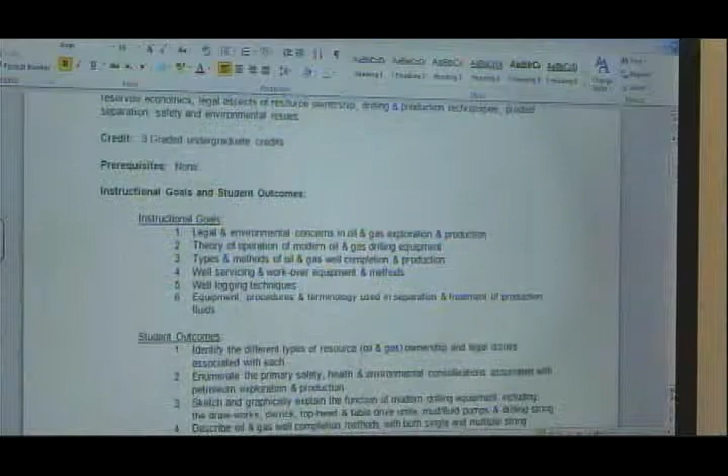Okay, first quiz was over 1 through 4, that's what I thought. So the second one is over 5 through 10, and we will be starting into 10 today. I don't know that we'll cover quite a bit of the well production, secondary, tertiary recovery, things like that. The quiz will not include anything to do with offshore transportation, rail, trucks, or any pipeline.

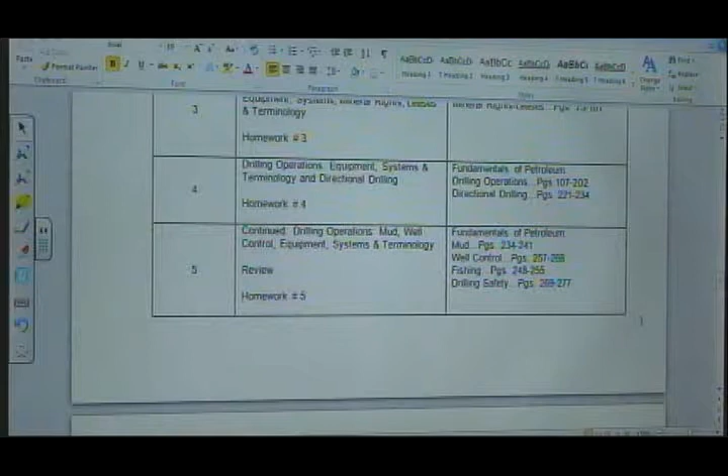It won't have that, but it will have everything 5 through 10. So 5 through 10 covers everything from drilling—there'll be some things on drilling, but we pretty much covered that on our last one. I had you do the drill rig and all that. So this would be more on offshore, and then well completions, casings, wellheads, things of that nature. Some of the things we've been talking about: well production, and then getting into secondary recovery and that type of nature. Maybe a more limited quiz because we are just about half a class behind where we'd like to be.

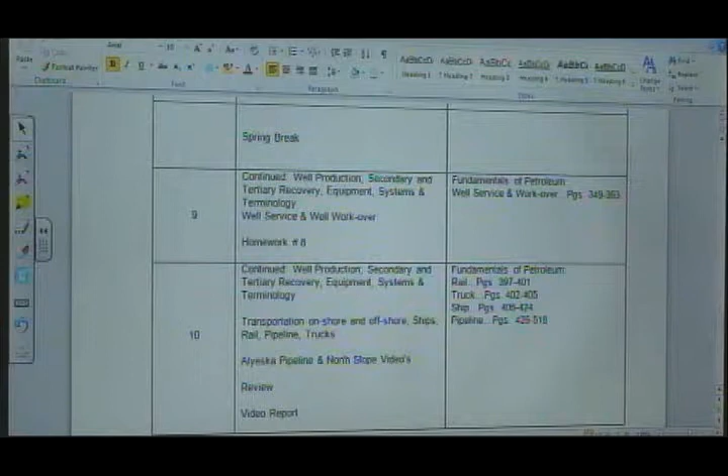But I'm not going to delay the quiz. I want to get it out of my hair so that we can keep focusing on things we need to cover, because we need to move on into emulsion, natural gas, and some of those types of things.

Fair enough? So you may have just a quiz, not even a test, quiz. Wow. Yeah, that was Jeremy, good. I don't believe you, but that's okay. I know you're skeptical, I can see that. Yeah, really, I don't believe this.

I mean, I can omit lots of questions, but I did give a whole different kind for operations today. I gave it in the simulator, so they didn't even have a paper quiz. But then they finally realized what they did to themselves. So I don't know if they're really as happy as they wanted to be.

It's like your take-home quiz. It was fun. Well, they realized that they took everything off of quiz 2 and moved it to the final. The final's already bad. That final's going to be worse.

I don't pull any punches on operations. I tell them first day in class, right? I tell you, it's a bad final. Define bad. What's that? Define bad? Not good.

I've actually had 2 people in the last 8 years get a 99 on it. But both of those people went down south, tested out in refining jobs, and out of 800 people scored number 1. They were extremely sharp.

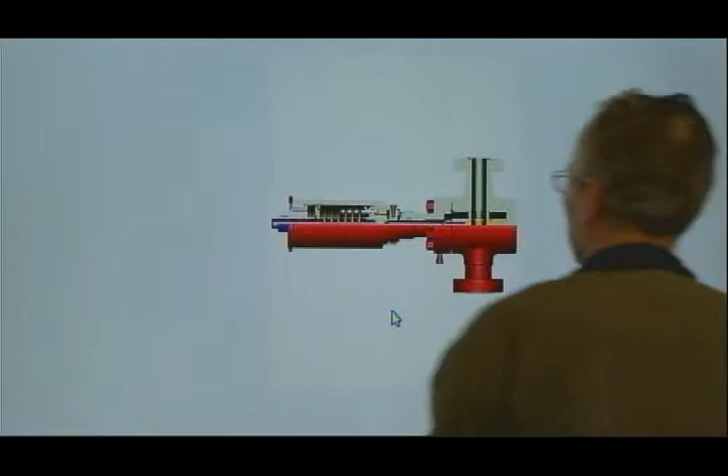It's going to go ahead and open it up so that you are over this way and you're actually flowing through. You've got this valve that comes across, a nice flat valve that's got a hole in the middle of it. And so what will happen is you'll flow up through there, but if you lose your hydraulic pressure, it trips out. The spring will cause this thing to slam shut. When it does, it stops all flow, just abruptly.

Okay? These can be mounted this way. They can also be mounted off your tree on an arm coming off, and I don't know if you can see that real well right here. You might be able to, let's see, I think on the, hold on a second, this was out at, no, I thought maybe the ones at Swanson River showed, this actually showed them.

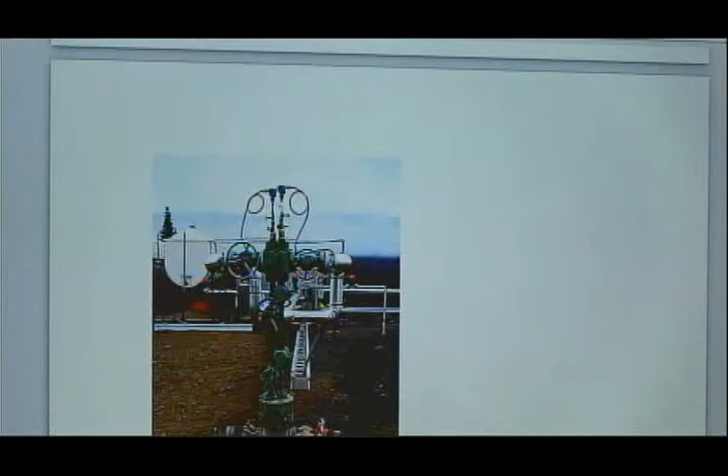And they had, this was a dual completion. We talked about dual completions. No, this didn't have it either. I thought that one of these had that, but it doesn't. Yeah, that was, I'll leave that up because we talked about dual completions. I'll come back to it. Hang on a second, see if I got it.

No, I don't have a real good photo of that where I can show you, but sometimes coming off of the arms, your main production will come on up and then it'll be like so, and then over here, I thought I had one at Swanson River that I could show you on production on a tree at Swanson River, and it shows very, very well on the XTO. Yeah, you can't see it well enough. The Swanson River picture shows it real well, and I don't have that available right offhand. It might be under my production side.

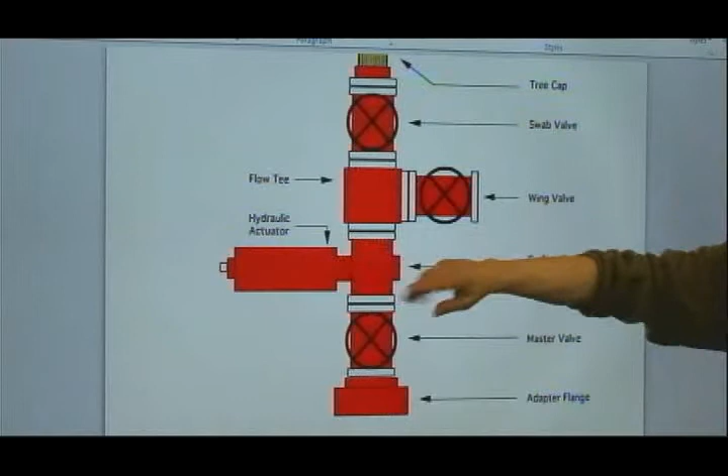You're going to see a tree today I'm going to show you in a little bit that's going to show two master valves, upper and lower. And so then typically, I'm going to have a surface safety valve that's going to be in line in my tree so I can stop all flow. But sometimes this comes right up like this and goes into my cross, right into an arm. There is nothing else. And so then what I might have is I might have it over here where I can go ahead and block all the flow in, which in essence is going to do the same thing. So it doesn't always have to be mounted like this. This is the point I was trying to make.

And so when you think of this and it looks like this could actually be on one of my production arms, and it could be mounted like so, and it would just look different, is what I want you to see.

It can look different than what you might be expecting. So when you go in the field and someone says, well, there's my surface safety valve, they can be made up differently than what you see. They don't necessarily have to be long and skinny like this. They might have a real short, round type of diaphragm system that can be very powerful, but it isn't long and skinny like that.

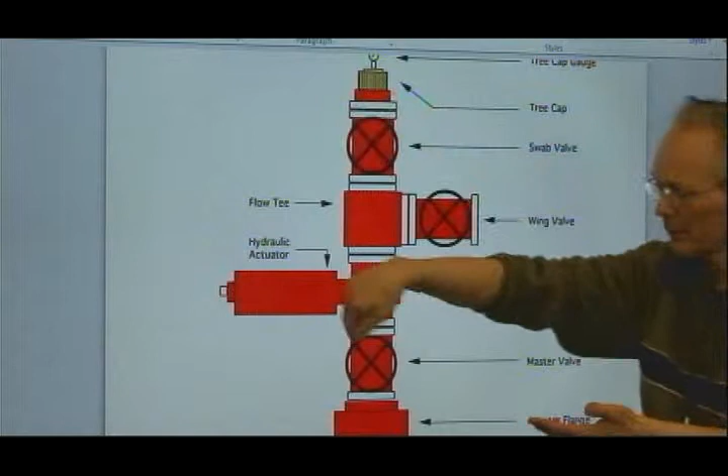All of them, though, will work essentially the same way. I'm going to have some kind of system downstream, coming off of my production valve and off of my wing out here on my production wing, that senses the pressure, which will trip and affect the pilot valve. That tells my hydraulic system to keep this pressured up. When it trips, it tells the hydraulic to either bypass and take the pressure to zero, or it's got a hydraulic pump that tells it to go to zero. It trips out one way or another, all the hydraulic pressure comes off, or pneumatic pressure if you're using air, and then this is going to slam shut. That's what we're really looking at.

So I want you to see that, it's important to know. Now, what was the bad thing about surface safety valves that we brought up last class period, just to review so we can move on?

If something's wrong with the Christmas tree, for some reason, when it gets blown off, there's nothing to stop the rest of the oil from coming out. These are only as good as from where it's secure, from the safety valve. Is it secure from here down? No, and I've got this very dangerous place right here, which was proven in Kuwait.

Remember the Kuwait fires that I showed you guys a little bit last class period? I think I still have those up, hang on, I'll show them again. Those were the fires in Kuwait, which Saddam Hussein, in the first Gulf War, blew up. As he left Kuwait, he blew up all the Christmas trees to try to eradicate their oil fields, and he did a pretty good job of destroying a lot of oil.

They were all free-flowing. Okay, and so to alleviate that problem, the state of Alaska looked at this, and nationwide also. Hang on, we'll open this up a different way.

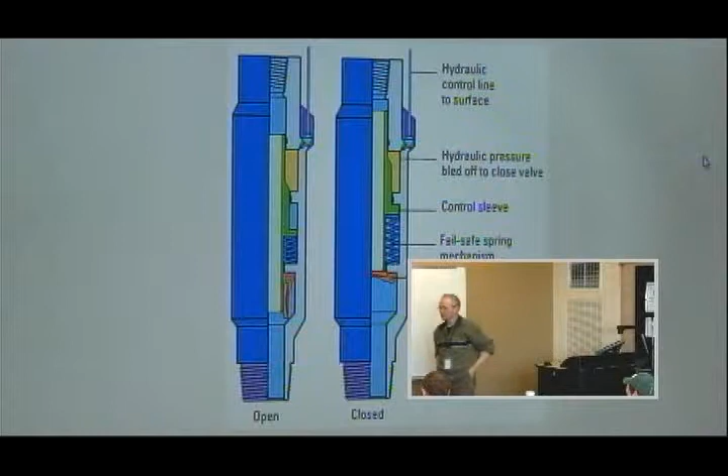The state of Alaska instituted rules that they started using subsurface safety valves, which means that when you go down the well, if I were to draw this out, somewhere down below, and I think this is about where we ended up last week, if this is my Christmas tree up here, let me draw this. I'm coming down in my well all the way down below the surface, anywhere from, say, a few hundred feet to 1,000 feet or more. I'm going to have a subsurface safety valve that I'm going to mount in my production line.

I'm going to be down below, down to a place where this is secure, so that if it blows out, it's not going to blow out and go into the formation, into my water zone or anything like that. In other words, if I even had a blowout in the line down here somewhere, maybe there was an earthquake and it messed my production line up, then this would go ahead and shut, and it would keep me from leaking into the water strata or anything like that.

So there's a lot of advantages in having these at different levels. In the North Slope, they are anywhere from 500 to 1,500 feet down or more. So it all depends on the well.

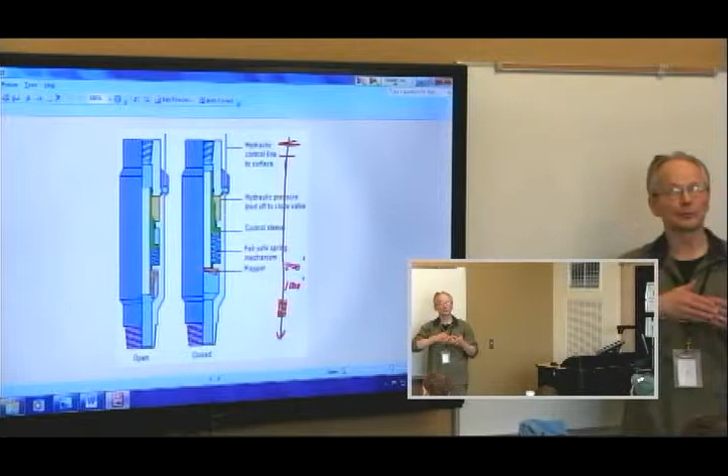In Alaska, over water, any gas well has to have subsurface safety valves. Any gas wells on land have to have subsurface safety valves because they're always free flowing. And this is just general rules, it gets very specific anymore because there's been some qualifiers put in. But you can assume all gas wells, and any oil well over water that is free flowing, is going to require a subsurface safety valve. Now, it's not that way necessarily on land. It depends on, they've changed the rules to where it has something to do with being adjacent to facilities or buildings and different things like that, where if it caught fire or something, it could actually cause some destruction.

So there's some real specific rules now. It's not necessarily universal just because it's on land. On land, it's considered easier to go ahead and obtain access to put it out if there was a problem. I don't know that I agree with that. I think all free-flowing wells should have these, but they do cost money.

Why do they cost money? What's the reason anybody can see right here? It would cost money to put one of these in. They look complex. You've got to put it down hole. I have to put it down hole.

What's it take to put this down hole? Can I do it with a wire line? No, you're gonna have to pull the production string up. I have to fit this into the production string, run hydraulic lines down, and assure this is working correctly. Then I have to have a Christmas tree and a wellhead up above that will accommodate that line coming through it. Almost the same as if I had an ESP, same kind of thing. I've got to have some way of getting through that wellhead and that Christmas tree.

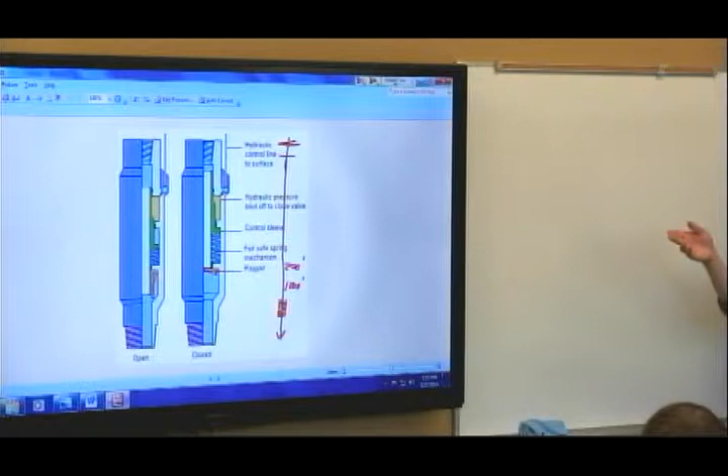So these are expensive to put in, and then you have to work with them, and if it fails, uh-oh, you have to drag it out. I have to get a workover rig in, pull all of that string back up, service it, and put it all back down again. Is that costly? Yeah, a lot more than if it's just up there on the surface. So those are some of the considerations.

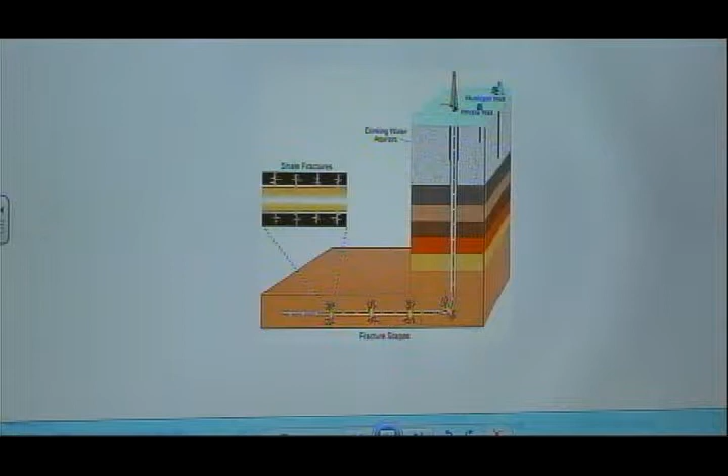When I say fracture the zone, there's a number of ways of doing that. One is I use high pressure water. I literally take water at a very high pressure and pump it down into my well, forcing it out into the formation at such a pressure that I'm cracking the formation. With your Marcellus Shale, that will make all kinds of lines, just like what you see, and this is what it does.

I think I've got a better rendition of this. Hang on just a second. This is a well before and after fracture is what it would look like. Before fracture and after fracture, in which you actually would increase the roadways, if you will, for oil to begin to seep in.

These just being little bits of oil. And when we're out walking my dog, I think I ended up with more hair on me than she did. You know, see all these hairs in my eyes.

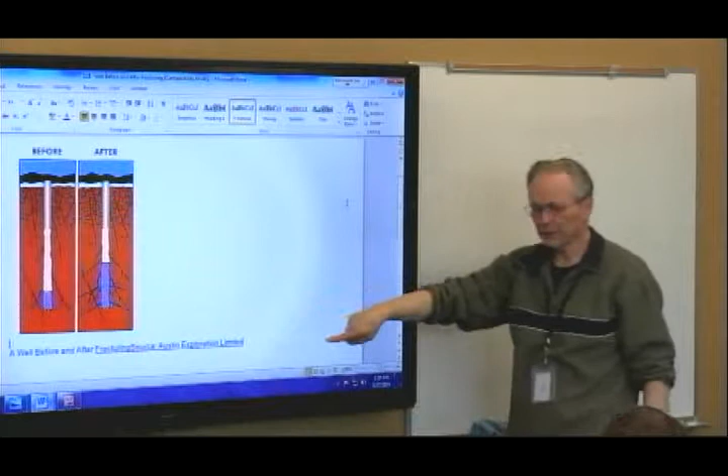So part of this fracturing—and there's nothing magic about it having to be a horizontal well—fracturing was around when we had nothing but vertical wells, and we would fracture formations. Then when we got into deviated wells, we'd fracture formations too. But now it's really good for these long horizontal completions, because if I fracture and then I've got these long completions, I can take what were marginal oil wells or gas wells before. I've made a long highway, and I can begin to pull it in. So I use high pressure water.

Sometimes I'll use what's called proppants. Just a minute, I'll show you what I'm talking about. Proppants are literally frac sand. And frac sand, or the term proppant...

I don't know if that's spelled with an A-N or an E-N. Probably an A-N. Yeah, proppant. Okay, who said A-N? I did. I've read it, proppant. Yeah, I get my E-Ns and my A-Ns confused.

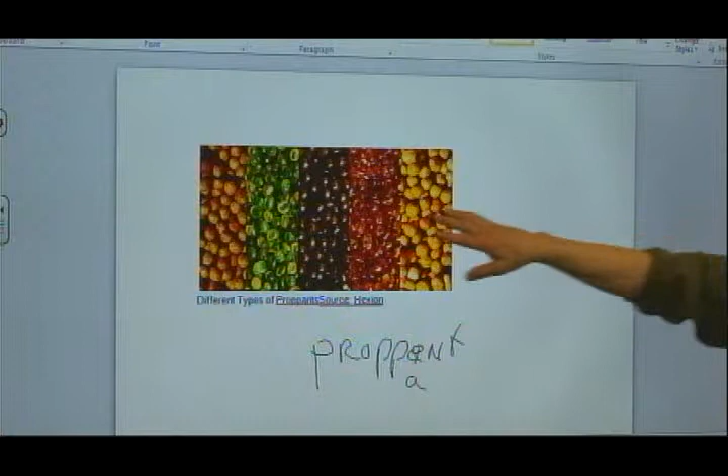Proppants originally were real sand, and what it was intended, and now they are made out of a polymer, real hard, extremely hard polymer.

When I say hard, we bought a bunch of this used stuff when I was running a sandblasting business, and we were using it and then recycling it, and we can't destroy this stuff. Terrible sandblasting medium, it has no jagged edges on it, so all it did was just like a little bead blast. And you'd recycle it, there was no dust, because it doesn't break down. In fact, you can't break the dumb stuff down. It's so hard, it's as hard as a diamond, and you can't cut it, you can't smash it, you can't break it, you can't do anything.

And that's what it's intended to do, is to mix it with the water, under high pressure, blast it into your formation, little minuscule bits of sand. What they do is keep little areas of the formation open to increase the permeability. It's not that I'm making spaces for the oil to be there, the oil is there, it just doesn't travel well because it doesn't have good trails to travel on. So you jam it with frac sand and high pressure water, and you fracture the formation, you blow this stuff back in there, you create these oil highways, and then you increase the production.

The other way you can do it is to also use acids of different types, different chemicals. The acids will literally go into the formation, and what they do is begin to etch and eat away at the rock, and they open things up. Any minerals that can be easily dissolved by the acids will then open up these highways.

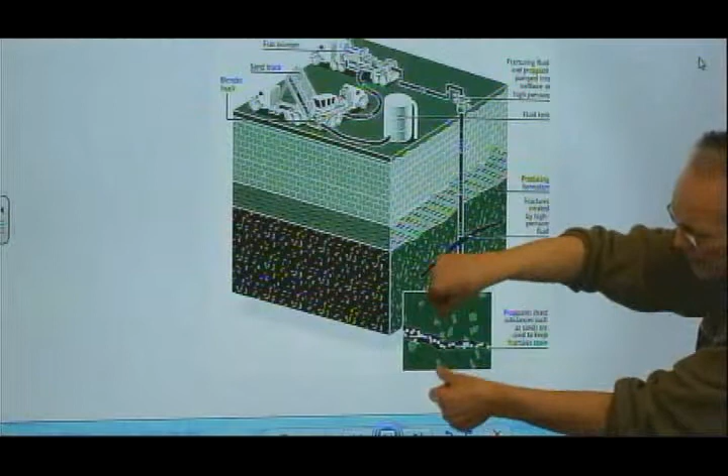This gives you an idea. Here we've fractured it with high pressure water. Here we've added the proppants that will then tend to open it up. Now, if I put chemicals in with that, then what I'd be doing is eating up little pathways that come into these areas that I have made. And so that's what I'm looking at.

But don't think it's great big avenues and holes in the formation. It's just a shattering. Anybody ever had a windshield break because of cold weather? Spider cracks, yeah, just spider cracks everywhere. The same thing, that's what you're looking at, is these minute cracks and trails all over inside the formation. And don't think just in a horizontal plane, think 360 degrees, three-dimensional. It's like one great big huge mass of roots going into the formation.

The more the better, I would imagine. Yeah, it is, up until you get to the point where it's too much cost. And it is very costly because we're talking about a lot of equipment, a lot of high water. A lot of the water is reused now because it has a lot of cost value, especially in places like West Texas or New Mexico where water is not available. And then you're using frac pumpers, big triplex pumps, maybe multiple pumps, where you've got a lot of pressure, a lot of volume, and a lot of hammering to get this pressure up and push it into the formation. You're pushing material into something that doesn't want to receive it, and so it cracks and shatters to receive what you're doing.

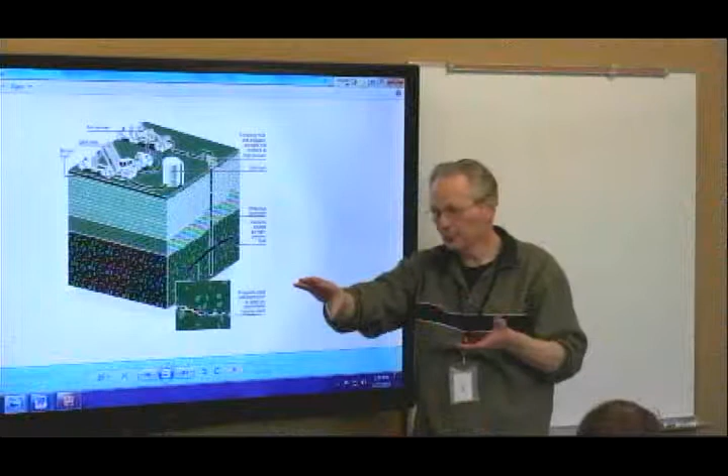And it has caused problems, absolutely, because of careless regulations and careless oversight on the part of the different state governments when it first started off. All of this Marcellus shale and some of the oil, shale oil, nobody was watching what was happening, and people were drilling down very shallow near the water zones, near your aquifers.

So then they were going ahead and fracking, and now gas was intermingling. What did we find when we don't have good casing? Things will flow from one area to another, and a lot of these were run without any casing. They were not just barefoot completions, they were completions without casing.

And so then what you had is a tremendous intermingling of water and natural gas, more natural gas problems than anything, so literally the horror stories of people opening their spigot for their water and their water would actually catch fire, that's true. There was enough gas coming out of their water that they could torch it off.

So here you've got a faucet, you put a match to it, it burns, now I've got hot water. No, you'd get rid of your heating bill that way. So the only reason fracking has a bad name is because people were careless and dumb. Yeah, and a lot of that's under control now. It really is, serious control. And there's been a lot of regulations put in.

If you read the news, fracking's been going on for well over 100 years in California. It's been going on in Texas, New Mexico, all through the Midwest. Here in Alaska, it's been going on for almost 100 years, and there was never any problems. It was where it was very, very loose, a boom mentality situation, and people just took advantage of it for a few years. Gave it a bad name, but it's pretty well settled down now. Most of the problems they talk about now, I'd say 99% of them are from prior years. So it's pretty well settled down, and it's well under control and oversight, but it wasn't in the beginning.

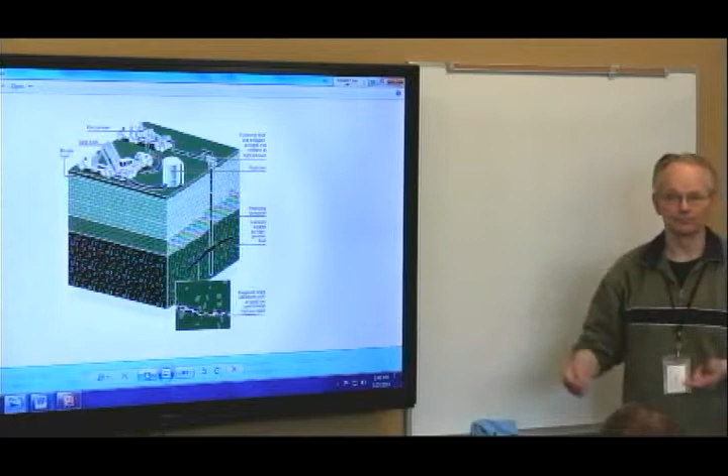Where am I doing this at? At exactly what level in my oil well? Let's take one that's not real deep. We talk about 10,000 feet here, but let's say we're at 7,500 feet. Am I going to have my potable water aquifer at 7,500 feet down? Possibly, probably not. There's probably going to be clay layers in between. And if I did have a viable aquifer at that level, I wouldn't be allowed to frack there. EPA wouldn't let you do that.

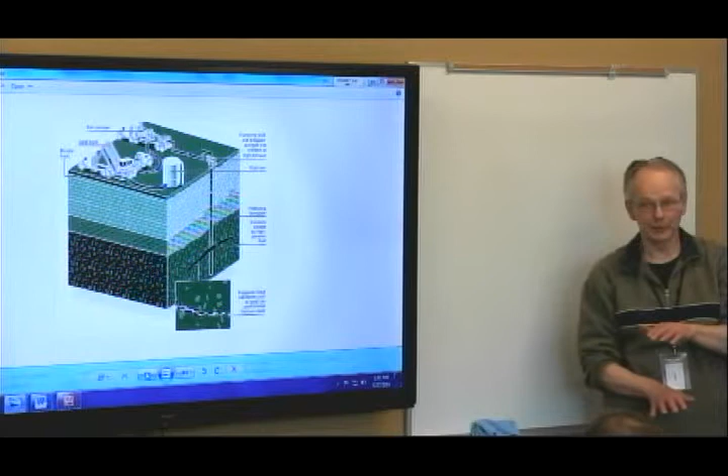But if I'm at, say, around here, and there's been a lot of hydraulic fracturing going on for years, if nobody even knew it, but I was fracturing at 10,000 feet, is that going to affect my drinking water?

Probably not. Who in here has wells that go down over 150 feet? Anybody? I think our low is like 26. Yeah, the wells for Agrium were at about 350 feet. Chevron's wells were at about 300 to 320 feet. You're way out of range. And those were considered deep wells around here, and they were massive producers. There's a river down there that you can't believe. You can pump all the water you want.

We were pumping right about 2,500,000 pounds of water an hour at Agrium. Out of about 4 wells, maybe 5. That's a lot of water. But it was from just 300 feet down.

Harley? That's the thing, the reason we probably pump so much water without drying up the reservoir or whatever is probably because we're on a sedimentary kind of area, a basin, right? And which is pretty absorbent. And we've got this inlet just right there, and it's probably just gravity feeding water. Lots of water, and we've got a lot of snow melt off our mountains. Now, some places don't have that.

You get down in West Texas, and there's a lot of concern, because you have the Ogallala Aquifer, but there's a lot of people drawing water off of that, and they're using it for what? You've been down in Texas. Agricultural irrigation, that's right, irrigation, drinking water, things like that, and everybody's using it. Now, do I want to go ahead and have people doing fracturing that are using vast amounts of water with no recovery? That'll piss people off. Yep, it tends to make them really upset, that's right.

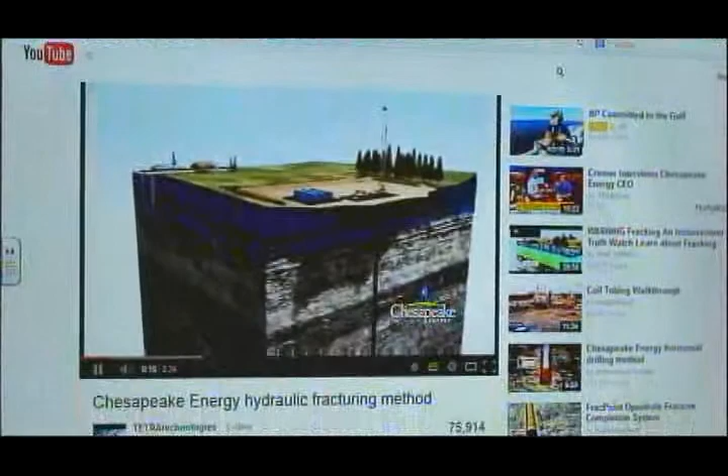In preparation for the fracturing process, the casing will be perforated in the horizontal portion of the well using tubing-conveyed perforating guns containing explosive charges. The perforated intervals are spaced approximately 50 to 80 feet apart and create a connection between the production casing and the shale formation. With the initial perforating complete, the tubing and perforating guns are pulled to the surface, and the workover rig is replaced by a hydraulic fracturing crew consisting of a number of high-pressure pumps and blending equipment.

This equipment will pump a mixture of water and proppant, usually sand, through the newly created perforations in the production casing and into the shale formation.

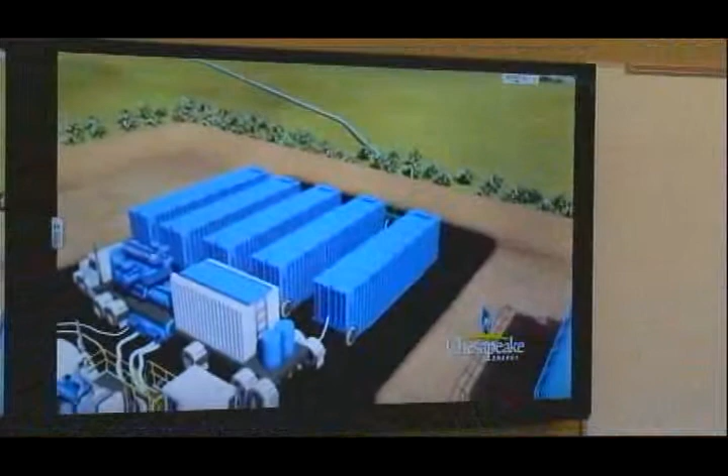First, water is passed from a water storage impoundment into the blue working tanks depicted on this location. The water is then pulled into a hydration unit, which provides the ability to gel the fluid before it is transferred to the blender. At the blender, proppant and a small amount of chemicals that aid in the fracturing process are added. The blender transfers the fluid and proppant mixture to the pump trucks through the low pressure side of the manifold.

The fracturing pumps increase the pressure of the fluid, sending it back through the high pressure side of the manifold to the frac tree where it enters the well. The entire fracturing process is controlled from the treatment monitoring van.

When the fracturing fluid reaches the perforations, pressure builds until the shale formation fractures, allowing fluid to enter into the formation. Additional fractures are created along natural zones of weakness in the shale. These fractures are contained within the shale formation, well below the ground.

After an initial stage of fluid called the pad is pumped to create a fracture area, proppant is added to the fluid and is distributed throughout the newly created fracture network. At the conclusion of the fracturing treatment, the proppant allows the fractures to remain open so that the natural gas can flow into the production casing and to the surface. This completes the first of several stages in the fracturing process.

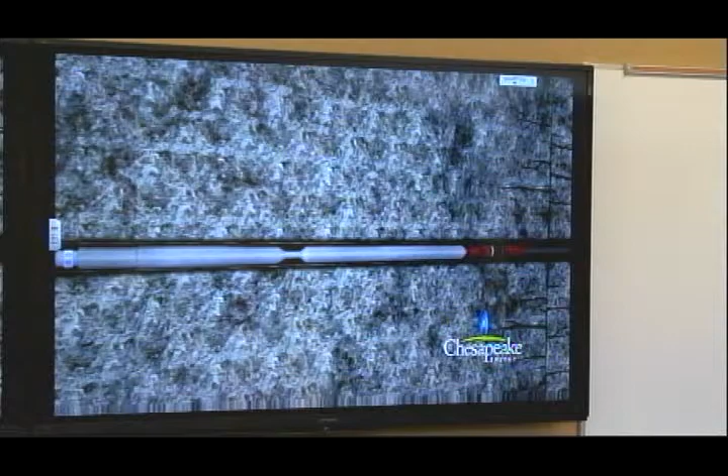This process is repeated by lowering and pumping down an isolation plug and perforating guns into the wellbore to complete the next stage of fracturing. This time, the tools are conveyed into the well by a wireline unit, which allows the fracturing process to proceed much faster and more efficiently.

A lubricator is used to control the pressure of the well while the operation is taking place. On the bottom of the perforating gun, a composite bridge plug is placed to isolate the newly fractured zone. This ensures that the subsequent fracturing treatment is contained in the current zone.

The perforating gun is again fired at roughly 50 to 80 foot intervals, creating a connection between the production casing and the shale formation. The fracturing process is then repeated until all of the stages are completed. A typical shale well has approximately 8 to 12 stages of fracturing. At the conclusion of the fracturing operations, the isolation plugs are removed from the well and production can start. The produced fluids are diverted through a flowback manifold into storage tanks. The fluids are then recycled or disposed of according to state and federal regulations.

That help a little bit? Well, without the proppant, those fractures will naturally reseal? Yeah, that's absolutely right. Yep, they will reseal.

Now, there was an acidizing process that they used to do in the old days, which would help to eat that out and help keep it open, but they still would tend to reseal. The proppants make a huge, huge difference.

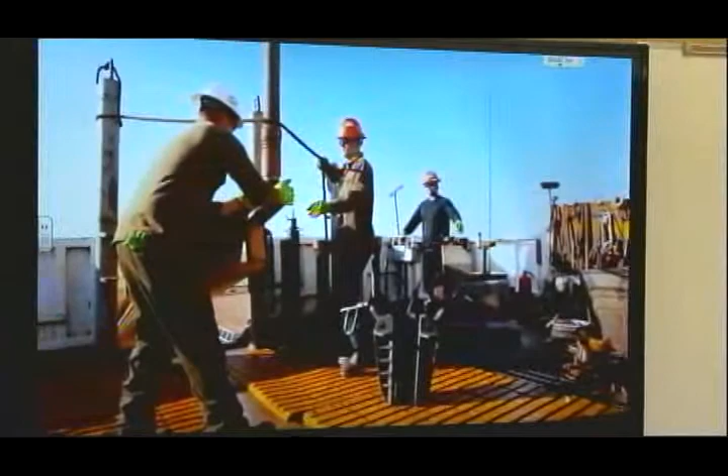Geologists have known for years that substantial deposits of oil and natural gas are trapped in deep shale formations. These shale reservoirs were created tens of millions of years ago. Around the world today, with modern horizontal drilling techniques and hydraulic fracturing, the trapped oil and natural gas in these shale reservoirs is being safely and efficiently produced, gathered, and distributed to customers. Let's look at the drilling and completion process of a typical oil and natural gas well.

Shale reservoirs are usually 1 mile or more below the surface, well below any underground source of drinking water, which is typically no more than 300 to 1,000 feet below the surface. Additionally, steel pipes, called casing, cemented in place, provide a multi-layered barrier to protect freshwater aquifers. During the past 60 years, the oil and gas industry has conducted fracture stimulations in over 1 million wells worldwide.

The initial steps are the same as for any conventional well. A hole is drilled straight down using freshwater-based fluids, which cools the drill bit, carries the rock cuttings back to the surface, and stabilizes the wall of the wellbore. Once the hole extends below the deepest freshwater aquifer, the drill pipe is removed and replaced with steel pipe, called surface casing. Next, cement is pumped down the casing. When it reaches the bottom, it is pumped down and then back up between the casing and the borehole wall, creating an impermeable additional protective barrier between the wellbore and any freshwater sources.

In some cases, depending on the geology of the area and the depth of the well, additional casing sections may be run and, like surface casing, are then cemented in place to ensure no movement of fluids or gas between those layers and the groundwater sources.

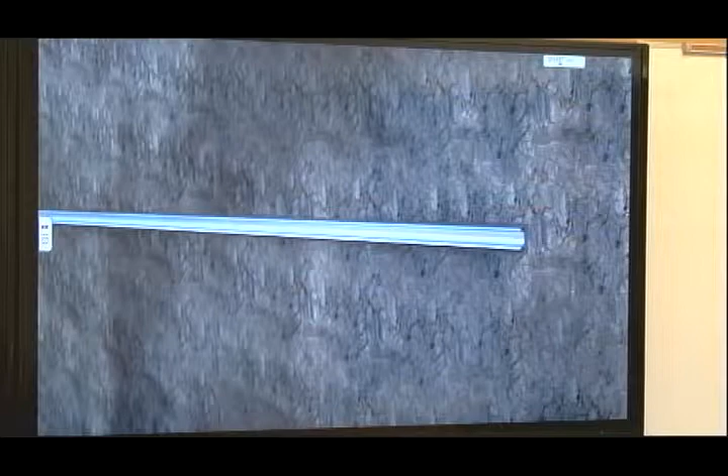When the targeted distance is reached, the drill pipe is removed, and additional steel casing is inserted through the full length of the wellbore. Once again, the casing is cemented in place. For some horizontal developments, new technology in the form of sliding sleeves and mechanical isolation devices replace cement in the creation of isolations along the wellbore. Once the drilling is finished and the final casing has been installed, the drilling rig is removed and preparations are made for the next steps, well completion.

The first step in completing a well is the creation of a connection between the final casing and the reservoir rock. This consists of lowering a specialized tool called a perforating gun, which is equipped with shaped explosive charges, down to the rock layer containing oil or natural gas. This perforating gun is then fired, which creates holes through the casing, cement, and into the target rock. These perforating holes connect the reservoir and the wellbore. Since these perforations are only a few inches long and are performed more than a mile underground, the entire process is imperceptible on the surface.

The perforation gun is then removed in preparation for the next step, hydraulic fracturing. The process consists of pumping a mixture of mostly water and sand, plus a few chemicals, under controlled conditions into deep underground reservoir formations. The chemicals are generally for lubrication, to keep bacteria from forming, and help carry the sand. These chemicals typically range in concentrations from 0.1 to 0.5% by volume and help to improve the performance of the stimulation.

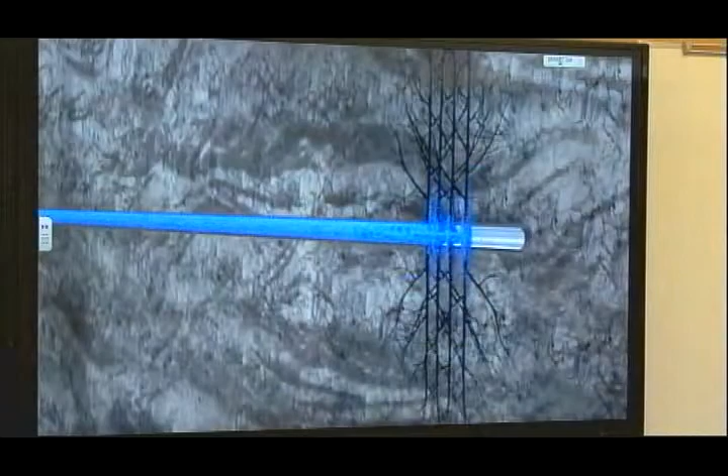This stimulation fluid is sent to trucks that pump the fluid into the wellbore and out through the perforations noted earlier. This process creates fractures in the oil and gas reservoir rock. The sand in the frac fluid remains in these fractures in the rock and keeps them open when the pump pressure is relieved. This allows the previously trapped oil or natural gas to flow to the wellbore more easily.

This initial stimulation segment is then isolated with a specially designed plug, and the perforating guns are used to perforate the next stage. This stage is then hydraulically fractured in the same manner. This process is repeated along the entire horizontal section of the well, which can extend several miles.

Once the stimulation is complete, the isolation plugs are drilled out and production begins. Initially water and then natural gas or oil flows into the horizontal casing and up the wellbore. In the course of initial production of the well, approximately 15 to 50% of the fracturing fluid is recovered.

This fluid is either recycled to be used on other fracturing operations or safely disposed of according to government regulations.

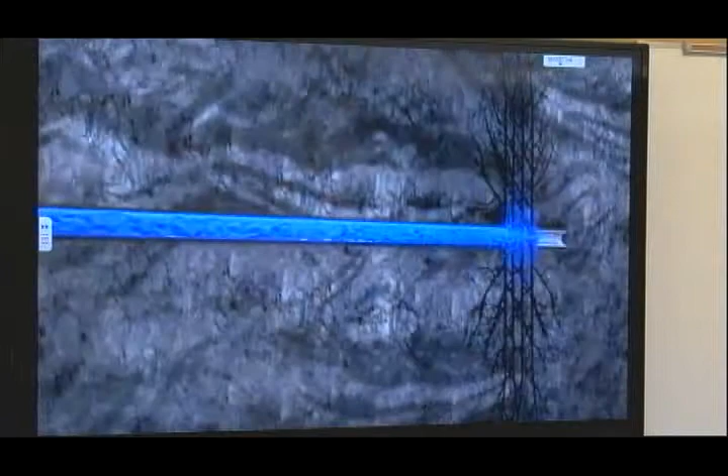The whole process of developing a well typically takes from 3 to 5 months: a few weeks to prepare the site, 4 to 6 weeks to drill the well, and then 1 to 3 months of completion activities, which includes 1 to 7 days of stimulation. But this 3 to 5 month investment can result in a well that will produce oil or natural gas for 20 to 40 years or more.

When all of the oil or natural gas that can be recovered economically from a reservoir has been produced, work begins to return the land to the way it was before the drilling operations commenced. Wells will be filled with cement and pipes cut off 3 to 6 feet below ground level. All surface equipment will be removed, and all pads will be filled in with dirt or replanted. The land can then be used again by the landowner for other activities, and there will be virtually no visual signs that a well was once there.

Today, hydraulic fracturing has become an increasingly important technique for producing oil and natural gas in places where the hydrocarbons were previously inaccessible. Technology will continue to be developed to improve the safe and economic development of oil and gas resources.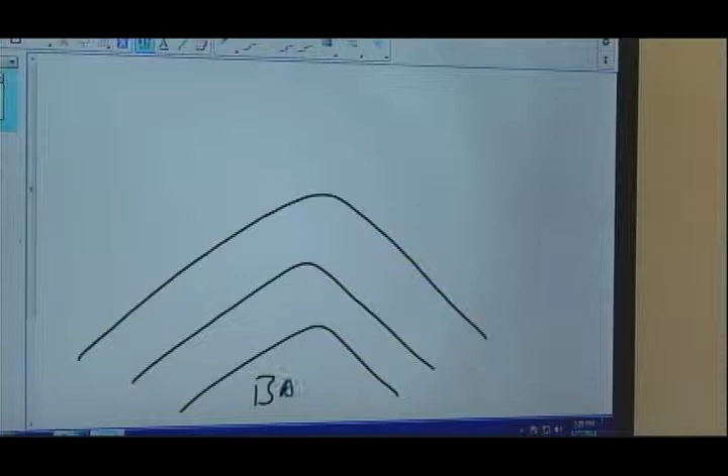Okay, so we've got our base rock here, and our capstone up here, and in between we have a formation. We're going to call this an oil formation. We have water right along here, then oil coming up to about here, and gas up above. So this is gas, this is oil, this is water. You guys are all familiar with this, right?

If I have enough pressure pushing on this water, say this formation goes out some distance, and I've got pressure pushing in on this water, it's going to cause that hydraulic pressure to give my oil a pretty good PSI. So if I drill a well down into this, it's going to want to come up here and produce a blowout, if you will.

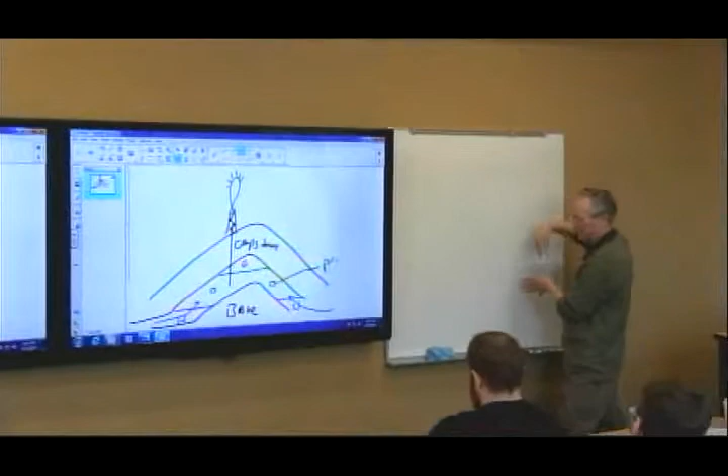But it's going to have natural pressure, because way back over here somewhere I may have some sort of aquifer or underground formation of ancient water, or it's coming clear up out of an anticline here, down through a syncline, and then pushing up. I could have some sort of dome over here, or who knows what, and I've actually got a lot of pressure. I've got an interface here between my oil and water, but I've got hydraulic pressure, just like a ram, pushing here. Maybe this comes down and pinches out over here, so now I've got this tremendous pressure. That oil is going to reflect that pressure, and until that pressure goes away, that oil is going to want to produce in free flow.

Free flow, okay? That's the term I'm looking for here.

As I begin to free flow, over time my pressure will begin to drop. If this is a 10,000 foot well, I'm going to have, coming back down right here at the bottom of my formation, about 4,300 pounds. We'll just keep that nice and easy to think about.

That means that if my formation is above that 4,300 pounds, or down here in my oil, if I've got say 5,000 PSI, I've got just under 700 pounds of upward pressure wanting to push up this well, so I can still produce. I'll be able to produce until the formation reaches that point.

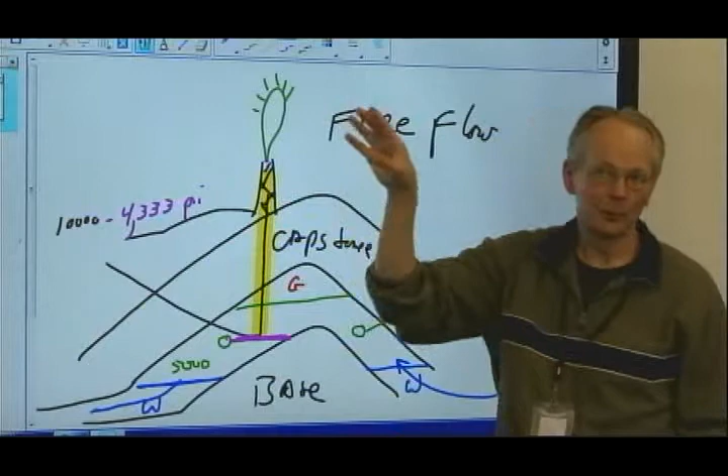We call this an artesian well if it's a water well. We've got artesian wells all along both sides of the Kenai River. There's this little farm down here that, I don't know what they call themselves now.

Huh? M&M? What's that? Diamond M. Diamond M. Yeah, Diamond M.

It's the Martin family, and they used to have, right alongside their house, an artesian well that flowed right out of the top of the casing. Scott Kraxberger, who taught here, used to be connected with Kraxberger well drilling. That was his dad's business, and they brought in a well one time down by the Kenai River that they couldn't cap. A 235 gallon a minute free-flowing artesian well right out of the top of the casing, blew out. It flowed like that for years. Free-flowing well.

So you can have free-flowing water wells. You can have free-flowing oil wells and gas wells. Gas is always going to be free flowing, but we're going to specifically look at oil.

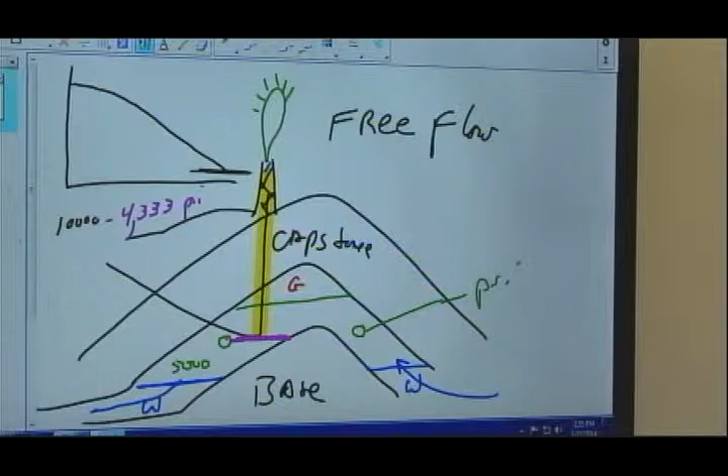So as long as my formation pressure was above my standing pressure coming from the surface, or my static pressure, I'm going to have a free-flowing well. But over time that's going to diminish. If I were to draw a graph of it, it would look something like this: over time my pressure would begin to fall off until I reach that place where it doesn't want to flow anymore. When it's depleted, it no longer free flows.

And I have to go into something that we call secondary recovery.

Doesn't mean I have to put a pump in right away, but I am going to have to go to secondary recovery because it won't free flow anymore. If I drop that 5,000 PSI down, and I'll do it sooner than this, but if I drop this down and I finally used up the pressure, my well is now at 4,333.

Okay, if I had 4,334, what would it be doing on the top of that casing? Just a little bit over. If I had 4,332, what would it be doing? Get down about a little bit. I could calculate it all out, but I'm not going to do that today. That's what you'd be looking at.

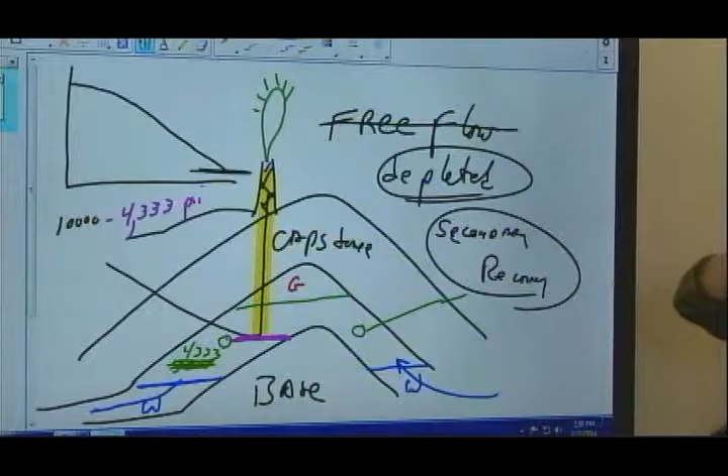I want you to think about that, because when the pressure starts to fall off, it is expedient for us to enhance the formation or the situation in some way to keep that well free flowing if possible. We do not want to have to go to a pump. Now I'm going to talk about pumps in a little bit, but pumps have fixed rates. If I can enhance the formation to flow at a high rate, I will produce a lot more fluid in a cost-effective manner. That's going to be a number of things.

Let me list some of those out, because they're all things that we're going to talk about. And then we're going to come back to our pumps, because I don't want us to be diminishing pumpability or giving the pump jack the evil eye, because there's a lot of good things about pump jacks. There's a lot of jobs for pump jacks, I'll tell you what.

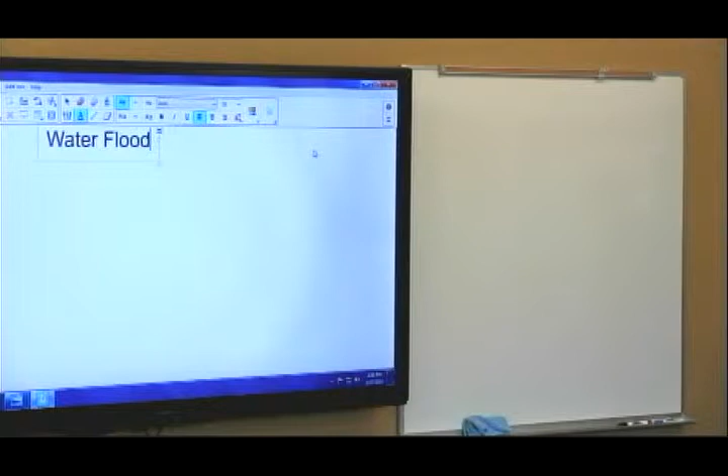So some of the things, if we started to deplete our pressure before we go to a pump, we would probably want to go ahead and have water flood or water injection. We're going to call it water flood. This is where we would actually be pumping water down into our formation. We'll cover that in detail, why water flood is a good thing. One, it's going to build pressure.

There's other reasons. Okay, another one is we might have gas injection. That's going to be the same thing, we're going to have gas injection. That's going to be similar to water flood, but water flood has advantages over gas injection. They both increase formation pressure, but with water flood, I can actually move oil around. With gas injection, I'm just pressuring up the formation.

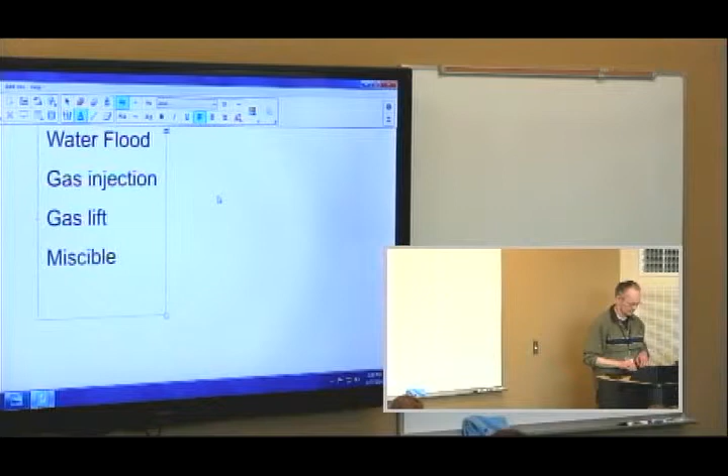Then I can get into another situation where I'm actually using gas lift. We'll talk about gas lift and how that also facilitates our secondary recovery. Then we start getting into tertiary recovery, and we can get into what's called miscible injection. And so I'm going to tell you that at Prudhoe Bay right now, they're using all four of these to keep the wells flowing, because it's way cheaper to have wells that are flowing and just maintain your pressure if at all possible.

And part of the reduction in production is because you don't want to lose that formation pressure, you want it to keep flowing without having to go ahead, and so you reduce the flow, keep the pressure up so that it will still continue to free flow. Then you can start getting into pumps.

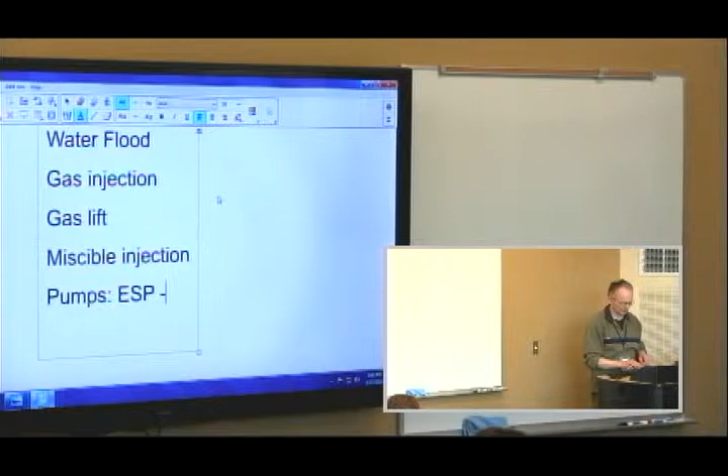Pumps can incorporate, let's do this. You can have ESPs. ESPs are electrical submersible pumps. You can have pump jacks, which are rod pumps, and rod pumps are a positive displacement pump.

You can have, I'll just leave that alone. Then you can also have, along with rod pumps, you can have deep rod pumps and shallow rod pumps. We'll cover that. You can also have, along with rod pumps, a power oil type pump, hydraulic actuator pump. I'm running out of space, hang on.

Henry, can we assume these processes would be done in the order of cost effectiveness? Absolutely, yeah, very much going to be money driven.

That's enough for me listing things out. What you're going to see is it's going to be depending on cost effectiveness. Let's cover that for just a moment. Out at the Swanson River field, they have no water flood, never have had. Does anybody have an idea of why they have no water flood? No water? Exactly, no water. What's the only water that they almost took? What's the biggest stream flowing through the Swanson River field? Swanson River.

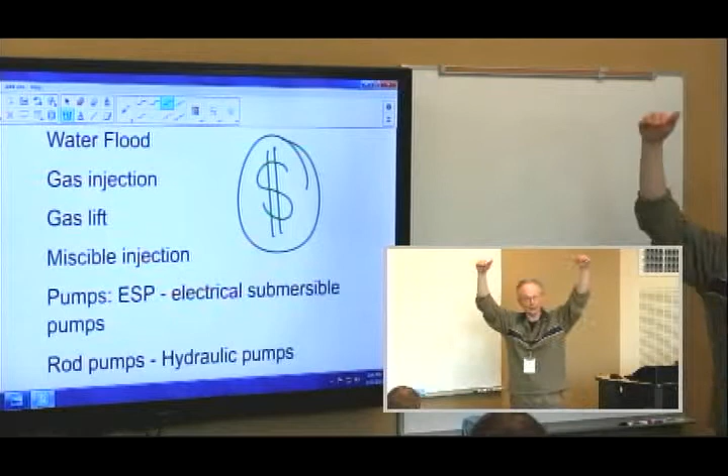It used to be a lot worse - it's not near as bad as it was. 40 years ago we had this thing called Lake George that used to dump up in the Chugach Mountains. I don't know if any of you ever read about that, but it used to dump periodically, about every 3 to 5 years, and come down the river, catching everybody by surprise like a huge, massive flood. That glacial lake would dump, and when it did, it would raise the river in a matter of just hours - from just sandbars to being 10 to 15 feet deep - and it would flow like that for days.

What would happen is it would wash this huge amount of glacial mud right down into the inlet, and the inlet would look as gray as Brad's coat for years. It would start to clear up because that glacial silt tends to be very fine and settle out, but the tide tends to keep it stirred up. Just as it was starting to settle out, Lake George would dump again, and down it would come and get very turbid again. That happened periodically, and the inlet was just gray - it looked like gray clay when I moved here.

It was really nasty, and that was the case all the way between the Ninilchik and Anchor Point. You'd have to go that far down, below Anchor Point, before you'd start to see fairly clear water. Well, now you see fairly clear water clear up past the Ninilchik. It didn't used to be like that, and you can get clear water tides clear up to the platforms now - that never occurred before either.

But what happened is Lake George hasn't dumped in a long, long time. Because it isn't dumping, the theory is that all of that fine silt in the water is finally starting to settle. It's enough now that rockfish are coming into the platforms and beginning to colonize around them, which they never did before.

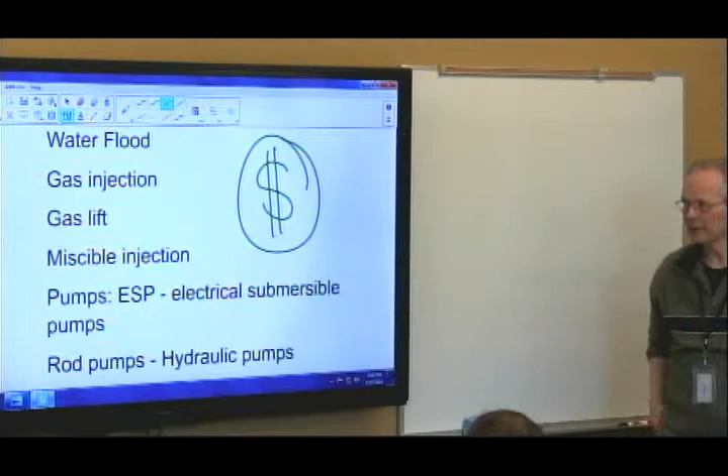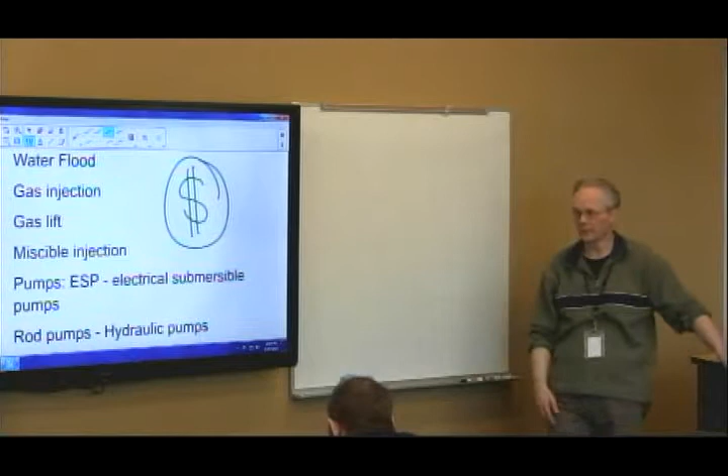And then you get into pumps. We're using rod pumps out in Swanson River now, and you guys are seeing it from the air, you just don't realize it - I'll show them to you, and then you'll know what you're looking at. Hydraulic pumps are hydraulic-actuated, with hydraulic power from the surface going down and driving a rod pump below the surface. ESPs have become the method of choice in the inlet because you're looking at producing a high volume of fluid, since the water cuts are so large. Does everybody know what I mean by water cut?

That's where you would actually take a grab sample and check it, run it in a centrifuge and see how much water you're actually making in your crude on a per barrel basis. And it'll be cut at a certain percentage.

A good percentage when I was on the Dillon platform was maybe 3 to 5%. That same Dillon platform today is somewhere around 80% water to oil. Lots of water. So if you're going to still recover your oil, you use an ESP, move a lot of fluid, dispense with the water, but keep the oil.

So then that changes everything. Now what do I need on my platforms? I've got to pull all of my equipment off and put in big power generators so that I can run these pumps. All right, let's go into some of this and see what we've got. But I want you to know that the rod pump is king, okay.

Now it doesn't look like much, but in any given day in the United States, there's about 450 to 500,000 of these pump jacks producing oil around the country on any given day. And somewhere close to 1 million barrels a day are being produced by all of these little pump jacks. Somebody can divide that out if they want, but that's not very much oil per pump jack.

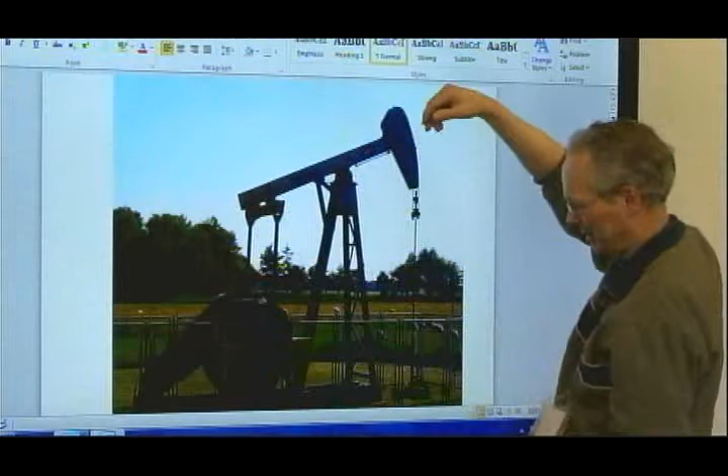This is called a horse head pump also. Jack used to work on these things. You've got your counterweight in here, and you'll have a small motor on it. This will go up and down. The reason you've got the curve here is so that as this is coming down, it keeps this in a straight line, and it doesn't cause it to vary or veer. This is your walking beam, kind of similar to the cable tool pump or drill rig, and then this will go up and down.

Positive displacement. Who in here's ever pumped water in a campground? Exactly the same thing. It's only that this is on down under the soil, quite a ways further.

I told you that they were pumping oil in Huntington Beach when I was going into McDonald's. You know, everybody's going, hamburgers, and I'm going, oil!

Over there hanging on the fence trying to see what was on the other side. I used to live down there, and they were in people's backyards fenced off. People would say, what the hell is that? And it's a horse head pump. That's right, in their backyard, they were making money off of that thing.

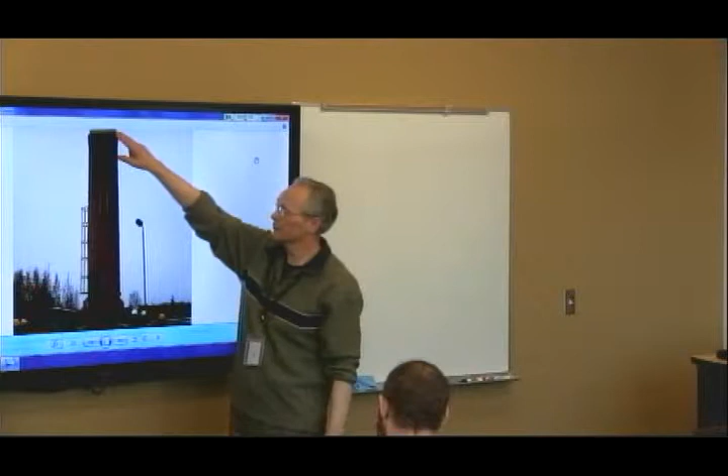This is actually a belt-driven rig, and if you guys are flying over, if you look down near the river and then over near, just north of the gas compression building, you'll see these. These stand about 50 feet tall, and this is your rod coming down, this is your belt. This belt comes over and down the other side, and it's driven by a great big huge belt off of some gears in the back with a 150 horse motor.

What this does is this rod goes down to 10,000 feet, a 10,000 foot long rod. So then what you're doing is taking what's called a long stroke, it's a 30-foot stroke instead of just being a little short stroke like on your horse heads. So then what you're doing is going down on wells that were not considered viable for recovery. They said, well, what if we get one of these and we go down, we begin to pump, and we'll see what we can do.

So they reworked a few wells, put a couple of these belt-driven deep well positive displacement pumps in. On this particular one right here, they're pulling about 225 barrels a day, 2 miles deep. Is that worthwhile? Sure, absolutely, because they were pumping oil - over 200 barrels on the average every day. And actually it doesn't... that goes.

Low maintenance. It took them a while to figure it out because they were having some problems with the maintenance part, because they didn't really know how to operate it. But then they got it set.

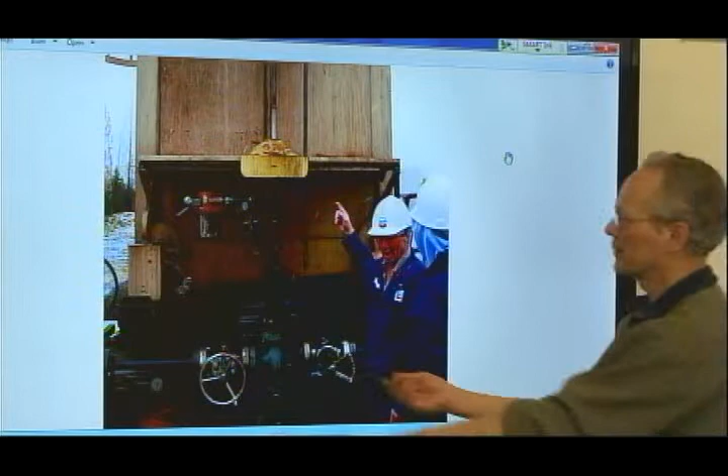And then this was off into production, and we were coming out at about 50, 60 psi and pumping. The belt had come all the way down at this point and was just on its way back up when it kicked and turned. So this is what nobody years ago thought we would ever be pumping oil here in Swanson River.

They said, well, it'll always flow because we've got gas and we've got gas injection and the wells will always free flow. Well, it became too costly to continue to pump gas down into the formation to try to keep the wells free flowing. So the wells were just shut in, and that's where they said, well, you know what, we think it would be worth our while to try this. And so that's become a pretty good tool. These are more reliable than the great big huge horse heads, but they are a little bit more costly as far as maintenance.

So let's take a look at a pump jack then.

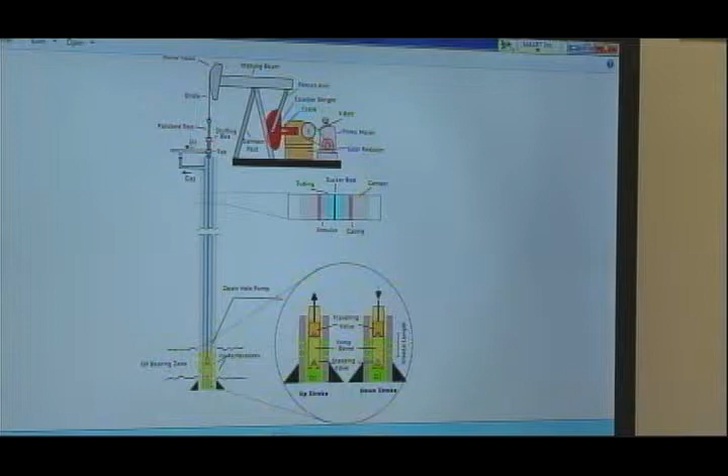Just a second, I'll take this up just a little bit. So on your horse head, your walking beam, if you were looking at your casing, this would be your casing, this would be your annulus, this is going to be your production tubing, and then your sucker rod going down between it. And this would be an expansion of what we've got over here.

These do not have a packer in them. If you take a look down below, I'm going to show you, they're going to be open all the way up. I'm going to have my production tubing coming down into my pump, and then I'm going to be open on my annulus all the way to the top, no packer. And when I'm open all the way to the top, what's going to take place is I'm going to pull the gas off, which is what you saw in the Swanson River.

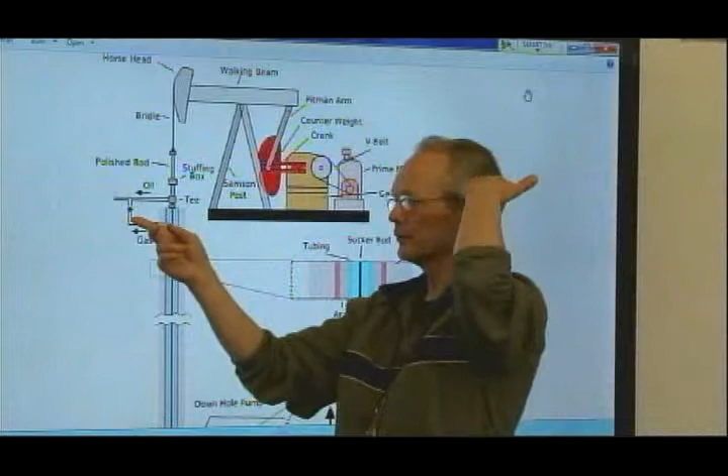They had oil going one way, gas going the other. And I'm going to pull that gas off, and then I'm either going to use it separately or recombine it with the oil. But I don't want that gas and oil mixing down here, I want the gas to break out of the oil. Why would I want that? Pump will cavitate, that's right. I don't want my pump cavitating.

So in this case, where a lot of times I've got a packer in there to separate things, in this case I don't want to separate. We're going to see the same thing with an ESP, we're going to have it open all the way to the top. I don't want that gas in the oil, I want it to freely break out if at all possible. So in here, I'm going to have gas breaking out.

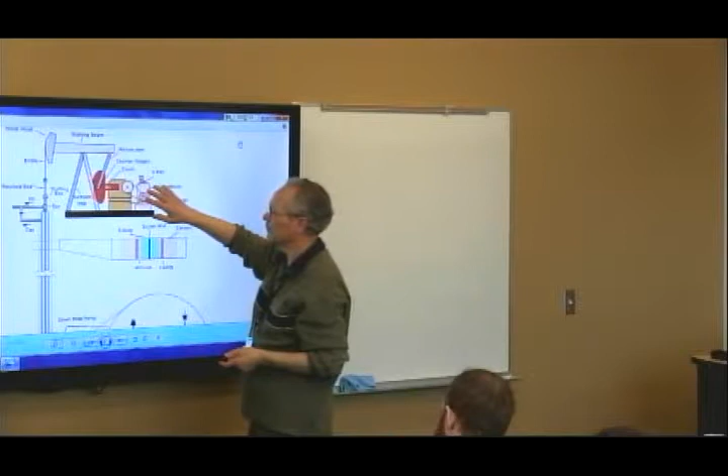I'm going to pull the gas off, and then I'm going to have my oil being pumped up, with the walking beam, the horse head. We're going to come down through our polished rod, the rod going all the way down through the stuffing box, and then the beam's going to be going up and down. It's going to be a slow operating motor, usually low RPM, and the entire mechanism is going to rely on a counterweight, or inertia, so that we are not having to put a lot of money into it as far as driving it.

Now that relates all the way back to when it was steam driven, where you could have a low power steam and then go ahead and use the inertia of a counterweight to keep things going, so that you're not having to pay a lot of money out for driving it.

Is that gas going to redirect just on through vacuum? Through natural vacuum, see how your gas is deviating and then your oil is... No, these are completely isolated from each other. Okay, think of it like this. This is my tubing, think of it as one string coming up. My annulus is completely isolated. These two are... and I'm glad you asked about it.

My annulus and my production string are completely unrelated. Oil sits there and the gas is... so I'm only going to have oil coming up my production string, and my annulus, think of it as a secondary tube. It's like I have two tubes. They have no intermingling here until I'm actually producing, if I put it back in with it.

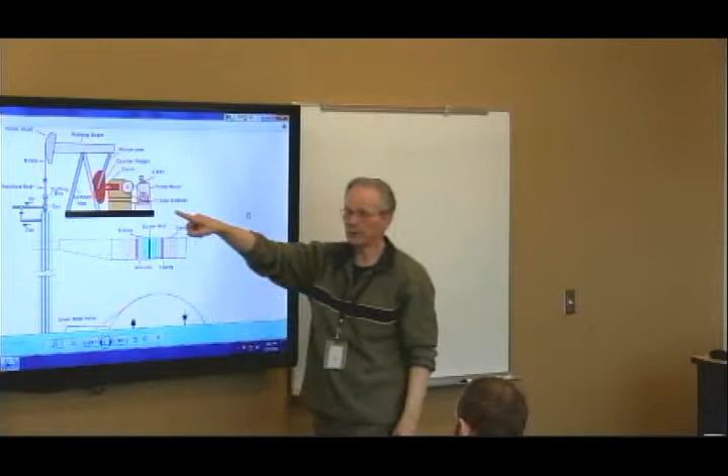Not always will it be that way. It could be I'm taking the gas out elsewhere, got it on some sort of compressor system.

And in here, you're going to have a standing valve, your pump barrel, and you're going to literally just be moving oil up, positive displacement. You're going to be moving it up as your rod is going up and down, and it's going to be just like a water well in a campground. I'm taking water and I'm literally forcing that water up through the tubing until it begins to flow.

Now, does that have a limit to it? Yeah, it does. You don't find these that will pump much faster than about 300. Jack, would that be maximum? I don't remember. I know Swanson River was maxed out at about 225 on that great big belt, and they just said, well, that's as much as we're going to do, and it wasn't worth the money to try to go any higher because they had to go into a whole different system.

And you get into mechanical limitations because you've got a lot of machinery moving in opposite directions and a lot of change in direction. It's not like an ESP where I can move a lot of volume because I've got rotating machinery. Here I've got mechanical limitations. I can only go just so high.

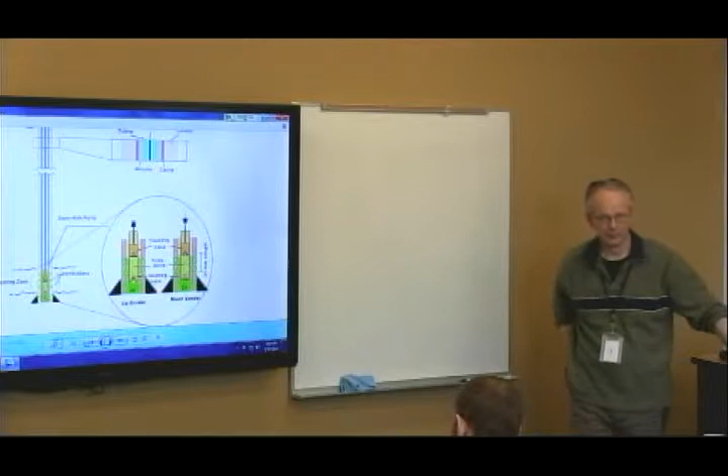Off the gas, and they run their engines periodically, self-starting and stopping. We did that on the platforms. We ran all our Waukesha's off the natural gas. You had to have special spark plugs, 3-prong spark plugs instead of your normal 1-prong. So they were really clean and efficient. They could be temperamental when you wanted to start them, but otherwise they ran great. I used to tear them down, put them back together.

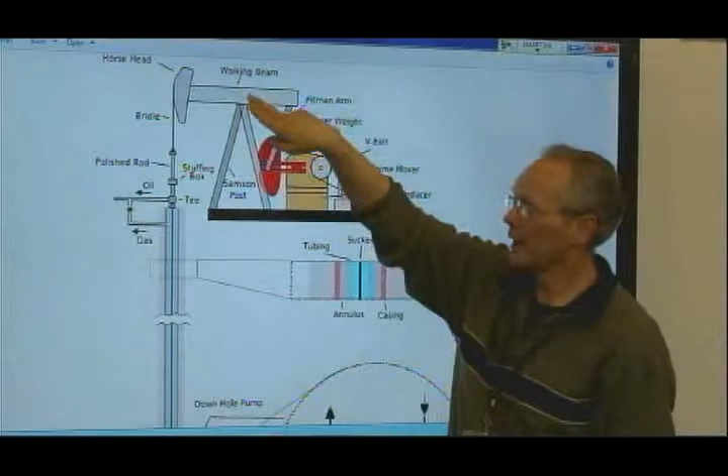Yeah, so you could do that right here, and you'd have your gas that you're pulling off that maybe you couldn't sell anywhere. Thank you, Jack, appreciate that. And I could have this back on a driver that's driving instead of using electricity, your own gas tank. That's right. Producing the oil, using the gas, producing here, and as slow as these things move, there's very little wear and tear. As long as I keep them greased up, the only thing that's going to bother them is an occasional tornado.

Another thing the farmers used to like, when the pipes went through their fields, they would put buckets underneath little leaks in the pipes and they'd collect the drip gas. Yeah, and they'd run that in their tractors. I worked with little guys who used to do that.

So let's take a look at a hydraulic downhole pump. This is, I said, hydraulic pumps, and I'm going to try to explain this as best I can. This is actually a... they still use these on the platforms, and this was before gas lift really kicked in.

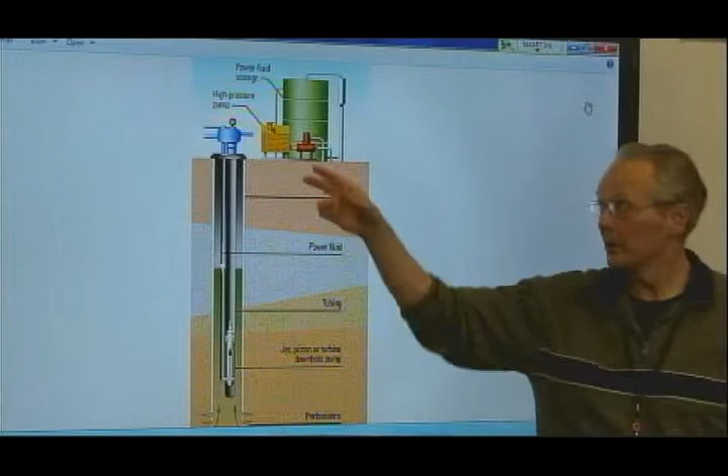Down below, you can have a turbine, jet, or piston, like on some of these real shallow water wells. But more commonly, between your hydraulic driver that's being driven off of your power oil, off of your motor up above, you'll have a driver and a pump connected by a rod.

So in essence, it's really a rod pump, is what you're doing. With this hydraulic actuator, what you do is you literally take power oil, which is going to be crude. I'll explain the startup in a minute. You'd have a high pressure pump that pumps this power oil down, coming down your well in your annulus, and then it comes into your driver.

Your driver pumps that in, it'll be a positive displacement hydraulic actuated pump that exhausts into your tubing string, but at the same time you're connected by this rod which is actually driving a pump, just like we saw with our rod pump. So instead of having a 10,000 foot rod like Swanson River does, we use power oil to go down on a short rod system, pumping oil using this power fluid to actuate it hydraulically, which causes the pump to pump, and then both the fresh oil and the power oil commingle and come up.

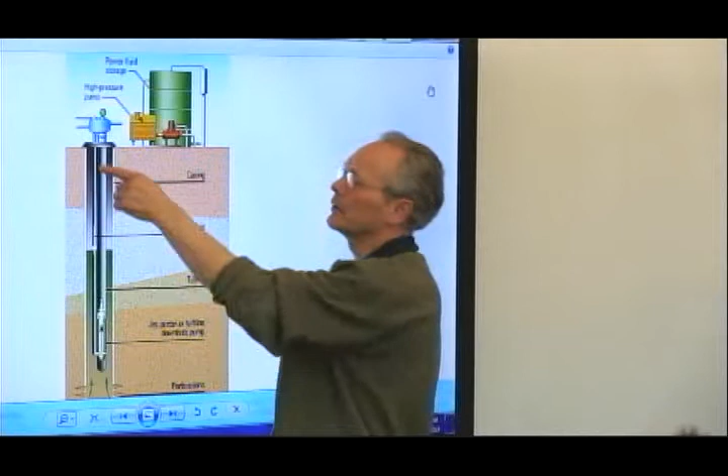We separate out enough to keep power fluid in here, and the rest becomes production. We used to pump down hole at anywhere from 4,500 to 5,600 psi, if that gives you some idea. Lots of pressure. That'll move it.

And they were extremely good. Let me explain this. On that big, long, deep hole rod pump, Swanson River was having to bring workover rigs in to change out the rods because they were so long and so heavy. They had not found anybody that had the tools to work on that type of system yet.

In this system, I don't even have to have a wire line. All I have to do is go through what we call a reversal, and I change the way the fluid is going down by reversing it here, and I actually cycle that pump. That pump and that hydraulic power actuator will actually cycle all the way to the top.

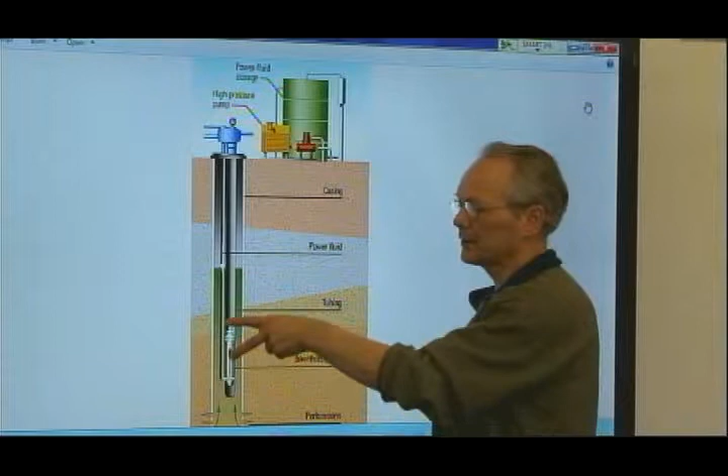I will put a catcher up here. It will catch it, then I can isolate it, pull it, work on it, put my catcher back on top, cycle it back down, it comes down into a shoe, and then it will take off and start pumping again. I've worked on many of those, torn them apart, put them back together again.

They still use these on the platforms because they're inexpensive to use, fairly efficient, and you're using your own oil as the driver. The only thing you have to do is have a motor strong enough to run a pump. It's a lot like running an ESP. The only limitation is how much fluid you can actually move.

They do operate at a higher speed than, especially if you get into the jet, piston, or turbine type, they operate at a higher speed than just a regular rod pump. These are called hydraulic actuator pumps, and I'd like you to know what those are.

So nobody has asked, well, how do you get that power fluid in there if you haven't produced any crude yet? Good question, huh? Where does that come from? Well, what we did is we actually would take some of our diesel, or have somebody bring crude out from some other place. You have to have something to start with.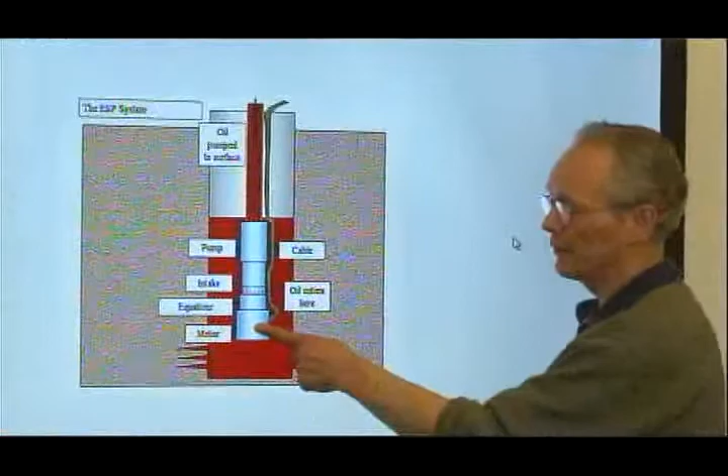I would expect that you'd be able to label this entire thing. And so you'd have a motor, you'd have your cable going to the top, think extension cord, and that's exactly what you have here. You're going to have an equalizer, you're going to have an intake, you're going to have your pump, you're going to have your oil coming in, and as your motor begins to turn, it's going to go ahead and crank just like think water well, and you've got it right there.

This is nothing but a water well. When you've got your electric cable going down into your well, it's exactly the same thing. A little bit different though, because these particular motors can be 200 feet long, 4 inches around, and be 200 or 300 horsepower. Weird looking little electric motors, but they can be extremely powerful, and they can move a lot of fluid.

If I'm needing to move fluid, and I'm doing it in a cost-effective manner, suppose I'm moving 5,000 barrels a day of fluid, but I'm also making 500 barrels of oil out of that, okay, that being a low percentage of oil, or maybe I'm only making 100 barrels a day of oil out of that 5,000 barrels of fluid, that's still 100 barrels of oil. Maybe even at 50 barrels of oil, it still is almost effective to move 5,000 barrels of water and fluid.

So this is where a lot of the industry is going. If Prudhoe Bay ever gets to the point where it becomes too expensive to run a lot of their secondary recovery, they'll probably go to this next.

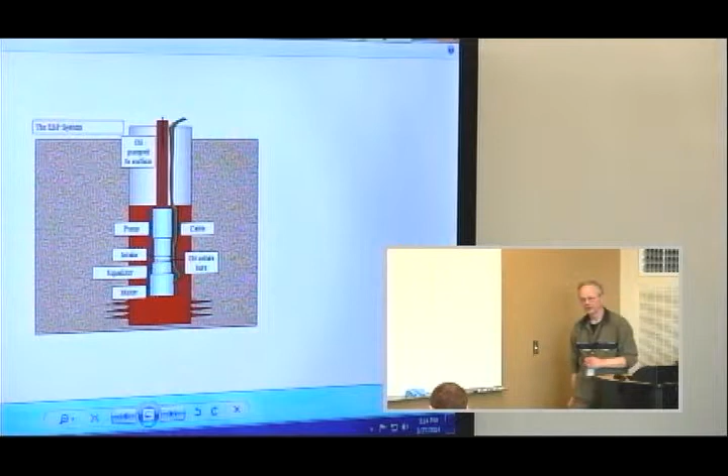Is that the equalizer to combat the torque, or what's the purpose of the equalizer? I think it's more on the torque equalizer. In other words, I think you just don't want to twist it. Yeah, so that you don't end up breaking something internally within that.

And so these are really good because what does head pressure do to this? Not really much. It becomes something that I look at, but there I'm more concerned now with my drawdown, like I would be on the water well, my drawdown this way as far as how far am I drawing that fluid down, am I over pumping or overproducing my field. So I'm going to go ahead and measure that with how much fluid I've got coming in, what my drawdown is, so that I don't start drawing down dry. If I start drawing down too much, I can leave stuff back in the formation.

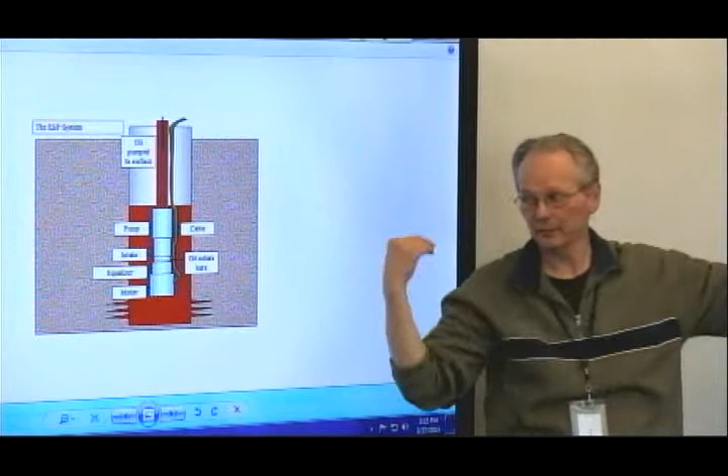What we've run into on the platforms, though, is a lot of platforms were built for hydraulic production and water flood production. Water flood's gone away, hydraulic oil has gone away, ESPs have come into play, so that meant that a lot of the infrastructure that was on the platforms were being pulled off and are bringing in generator systems, and a lot of them are turbine systems now because they have gas available, and so they're bringing in these small turbine units that will produce a megawatt of power or a couple of megawatts.

You put a couple of little tiny solar generators, solar turbines with generators, and you can produce 1 to 2 or 3 megawatts, and you've got enough power to run a lot of ESPs. And so that has tended to be the way a lot of this is going. So the entire industry and infrastructure in the inlet is changing. A lot of folks don't know that that's what's really taking place. They just know that there's a lot of activity. A lot of the activity is because of the change in the infrastructure and what's going on.

So let's keep going.

I'll show you. When we talk about putting in an ESP, that means I've got to change my wellhead. Why? Because what do I have going down my well? I have an electric cord, a great big extension cord. Up at the top, I've got this great big plug-in. And where do I plug this in at? A big 3-phase cord. So I have to change out my wellhead.

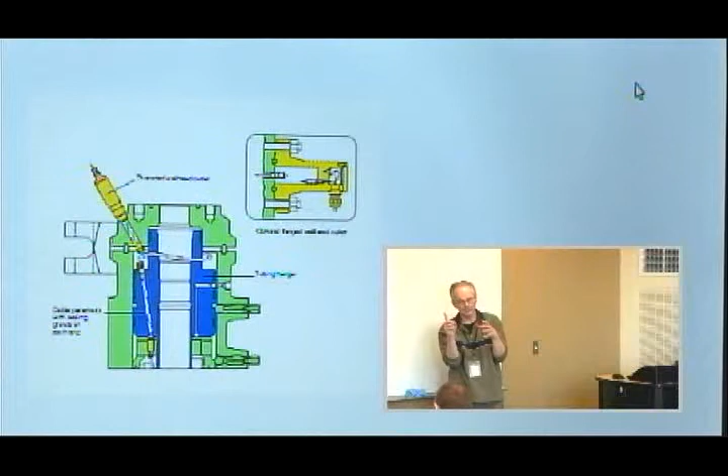It isn't just as easy as putting it in. I've got to come up with a whole new wellhead that's going to allow me to make an entry through that wellhead and bring that cord down into the well, where before I had integrity, now I've got a place that has got possible leak potential. Didn't have that before.

That's something I have to think about. The other thing is, consider this. If I've got this particular system hanging in my well casing, how do I change that out? Suppose my ESP decides to have an electrical problem and I have to pull that and change it out.

Can you do it with a wire line, or do you have to put in a workover rig? Can't do it with a wire line. I have to pull the whole string because that entire thing is hooked to the bottom of my well. So I want to make sure that when I put that in, I have got a good running system with good integrity going down, so that once it's in there, it's going to operate for a long time.

Anybody in here ever pulled their water well? I see them do it. Anybody ever do it by hand? Did that too. I did it once, and after that I almost lost it. It's a lot of footage to yank. It's a lot of stuff, yeah.

And so just our little tiny wells that we have, pulling them up, we went to plastic pipe after we had the iron pipe. Iron pipe got all ate up and everything, but that's still a lot of weight. And so you have to go in with a workover rig, and that tends to be expensive.

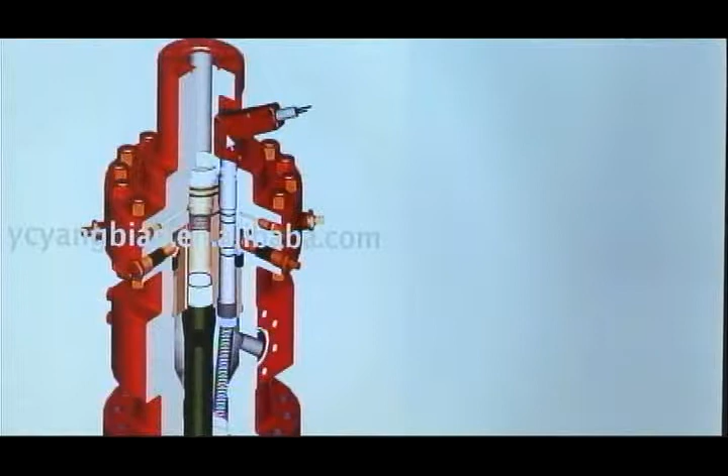This also shows the entry point right here for the electric line coming down and through. And so this becomes a potential place for leakage right here on your production. But then you would bring it on down through, you'd change this all out, this would be part now of your wellhead that wasn't there before.

Well, how much pressure are you creating at the top of that well? Theoretically, we're not dealing with any formation pressure, so it's a little safer, and then you're just dealing with whatever pressure the pump is creating. Yeah, it could be anywhere from 1,000 to 1,500, 2,500 PSI, something that's going to bring it all the way up. I've still got that 4,300 PSI of resistance coming back down at me. So I need enough that I can push that up and overcome that.

When I say that, I can have discharge pressures up that high. But normally, it's just going to be enough that I've got discharge pressures where I'm moving a lot of fluid. So, regardless, I've got my static head pressure. You may have 4,000 pounds at the bottom of the well, but I don't at the top. You only need 1 pound of pressure at the top, and then I begin to move fluid. So it's going to come down to how much fluid I want to move.

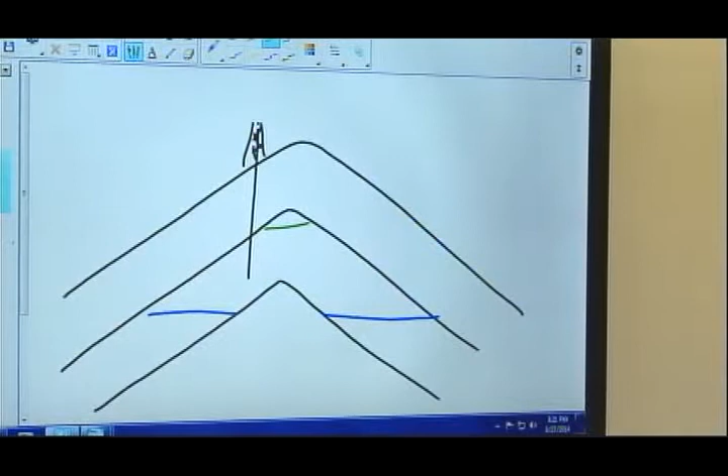And so we put in this other well, and when we do, we put it in like so, and we go ahead and come right down into our water. We begin to pressure up this water, increasing the pressure in such a way as it's causing this oil in the formation to increase.

We are actually increasing the production in our oil out the top of our production string. Maybe we'll go to the 10,000 foot well, where we had fallen down to say 4,500 PSI in our formation, and our production was down pitifully—we were just producing a little bit of oil. So we began water flood.

There's a couple of benefits on water flood. One, as we begin to pump in here, we're increasing the pressure. So we came up from 4,500 to say 4,700, 4,800, 4,900, 5,000. We're increasing pressure—that's obvious to everybody.

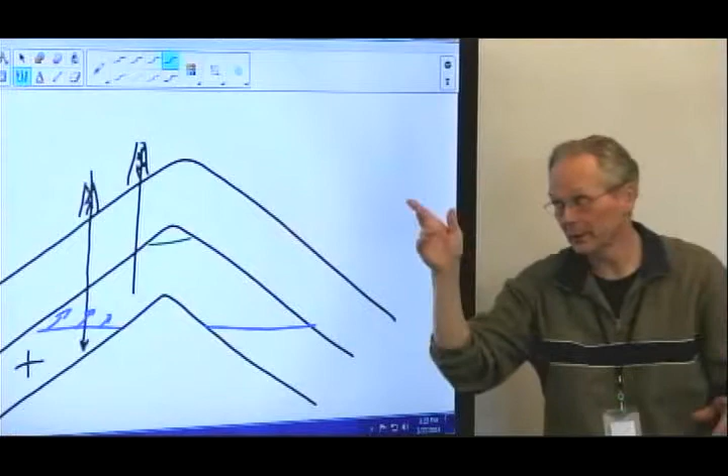Well, let's look at something else that happened. Let's take a look at another view—this is going to be a top view. So this is our oil field.

We're looking from the top down at the oil formation, and we realize that what we need to do with our water flood is we've done test wells. We've gone around and done a test well here, here, and here. We've done a demarcation, checked our wells, and this is how we came out with our design. We've realized that this is actually the boundary line for our oil field.

So we go, what we should do is put our wells in such a place. We're going to put our water flood wells—one right here, one right here, and one right here. And we'll put in new oil wells, right here and right here, and have these things drawing really hard.

What we're going to do is begin to help this oil migrate towards these wells. Maybe we'll put one more water flood well right over in this area, and we literally begin to create a front like this, where we're helping to herd, if you will—helping to move that oil. We're not only pressuring the formation, but helping to sweep that oil through the rocks as it's going. Anybody here ever clean a floor where there's oil, and you're causing that oil to move? Now you're going to leave a residue in the rocks.

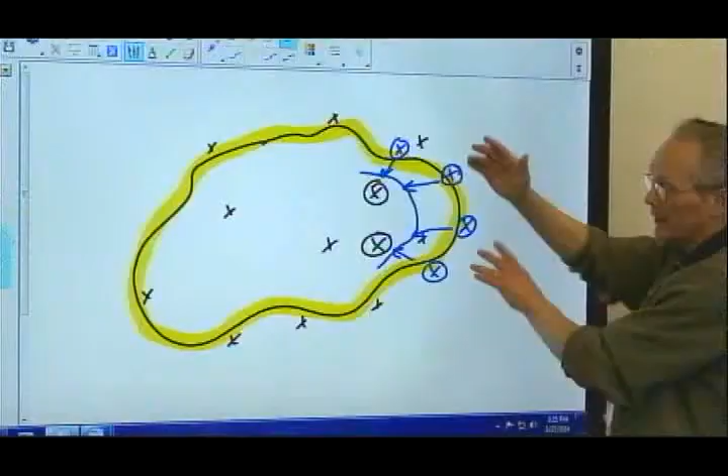We'll talk about that miscible injection later. But here, if I have good accurate placement—this is only looking two-dimensionally from the top, but three-dimensionally from the side, I would also be looking at what depths I want to put it in and that type of thing. And then what I do is I'm beginning to help that oil to migrate.

Why would I do that? What am I trying to avoid? Pockets—I don't want to leave any pockets back there. No oil molecule left behind.

Why wouldn't you want to put your wells at the opposite end and just force it all over? Well, I could try that, but expense-wise, it may be that I want to start here, and maybe this has always been the high production zone over here, and I'm wanting to start cleaning this out. Once I start this, this might be the first 2 years. The next few years, I might want to start in here. The next year in here, because it's going to be costly, first off. But I don't want to just hit and miss, putting one here, here, and here—that's not going to serve any purpose. Those formations are huge, some of them, with a lot of volume.

But you've just shown us where it is. Why wouldn't you put your water pressure on the east side and force all the oil over to the west side where your wells are? Oh, you're talking about pushing it all this way? No, where you're at—put your wells over here and force it all over there. Oh, I could go ahead, and this might be the case here. This would be the first layer. Second, this would be the first system. Next one, okay, this would be the first year.

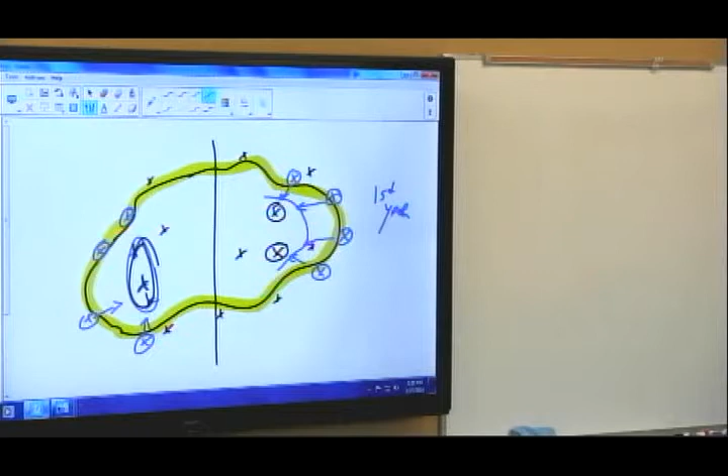And then as I begin to go, I could come along and put in some pretty good wells like this, so that by then I have cleaned this entire area out. I've left nothing back there, nothing back here. I could start working on this side and this side, pushing everything in this direction one step at a time until I finally come down to this spot right here.

One layer at a time. Think three-dimensionally. Yeah, God, what an awful mess.

But you don't want to take on more than you could chew when you're... how do you eat a whale? Well, one bite at a time, okay? And you can consume the whole thing, but you cannot swallow it all at a time.

So what you have to do is, it wouldn't do me much good to just set these here and start pushing from clear over here, because I may end up losing my motion. So I want to make sure I've got something drawing this oil as I'm moving until I get to that place where I finally arrive and I've not left anything back here.

Plus, wouldn't it, if you tried to just force it all into the middle in one shot or all on one side, it would take too much water or too much of whatever you're injecting down in there to move it all the way to the other side?

Saudis learned this the hard way. Going back to some of the stuff they learned on the Ghawar field, they started putting in big wells and big injections, and they said, it's really weird, our water's going in, but we're not seeing it anywhere.

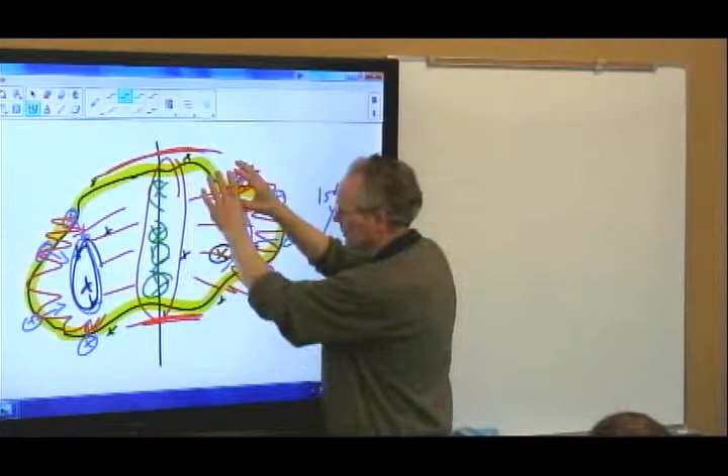Work on, say, just this section, so we don't leave anything behind here, this section, and then push. That makes sense. And that's really how it started—no, you had a good idea, Steve.

Too small though is what I was doing. Yeah, and so really what you wanted to do is go in, and economically this actually works more feasibly, because you take a little bit at a time—I've got that infrastructure in, now the next infrastructure, I see how my reservoir is responding that first year, then I go ahead and plan, because I need to see what I have.

I'm assuming that my geological structure is consistent all the way down underneath. It may not be—this is another thing the Saudis ran into and others. It wasn't consistent all the way through, and they found they had different permeability than they realized.

And so it's a matter of moving it and recovering it, and that's what you would have. Does everybody grasp what I'm talking about there?

Your reservoir engineers get into this, and there's been some real changes over the years after watching the Ghawar field, the largest oil field in the world, and what the Mexican government did with their Cantarell field and the destruction of that field—how to and how not to work an oil field. Also going back to the East Texas oil field and the kind of recovery that has gone on there, when it should have died about 30, 40 years ago and it's still a high producer. A lot of those things have been implemented at Prudhoe Bay, and that's why Prudhoe Bay is still a producing field and will be producing for another 30, 40 years at today's technology.

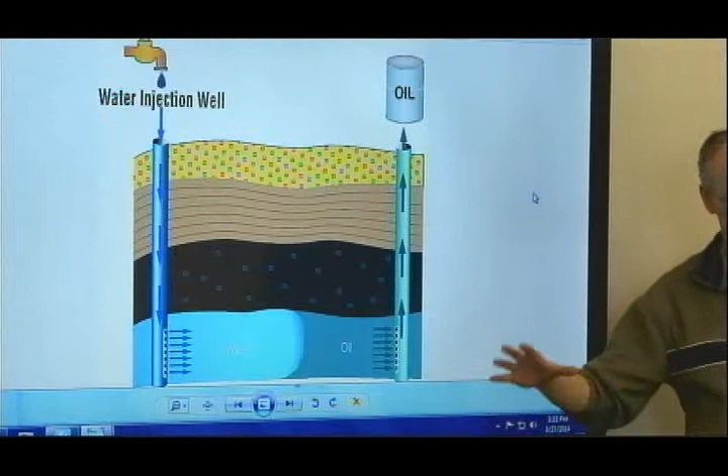That's funny. Okay, let's take a look some more at what we're talking about here. When we get into water flood, we want to move that water over in such a way that we create a force, if you will, that's not only pressuring the formation but causing the oil to move in front of it. A water flood is fantastic for—I call it herding oil—moving oil on a combined front, three-dimensionally. Whereas gas won't do that.

Gas injection: you push gas down and all it's going to do is begin to pressure the formation, but it won't necessarily move the oil in a combined front like water will, because water will begin to displace the oil. Along with gas, you can pressure up the formation with gas, then use water to begin to move that oil, especially if you've got some way of creating a low pressure sphere where that oil wants to go to that location.

So there's two ways of doing that: I can use gas lift to create a low pressure spot, or I can use an ESP or something like that that's creating a void, so that oil wants to move. We don't think much about those pressure differentials, but it doesn't take much pressure differential for it to want to move if we're patient under the ground. It will move, and it doesn't take a lot—it just takes a difference in pressure.

Here we've got force, here we've got something less, so it's wanting to produce, and it will produce without having to have a pump on it. It's pushing and pulling basically at the same time—kind of a push-pull thing, and it works pretty well.

So let's take a look. We've got another—whoops, I had another. Just a minute, I'll pull that up a different way. So this is another way of looking at it.

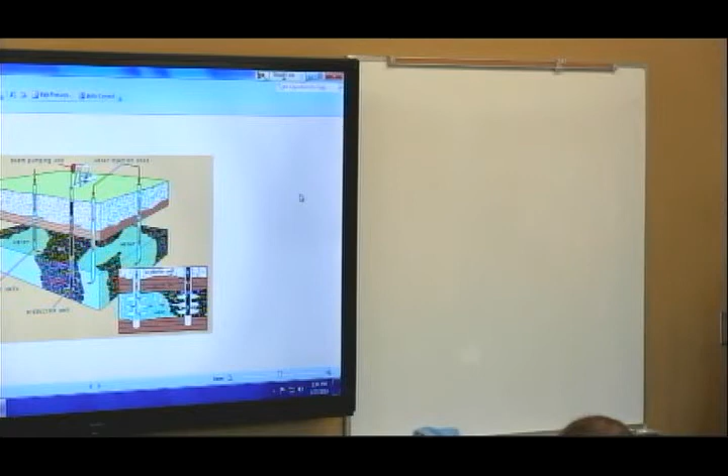This shows how you can put your water down with different water wells. Here we're literally moving—we've got a production well, we're moving it, and if we're not careful we could end up with oil that is stranded because we're causing a void with water. That's why you have to be real careful where you put these wells, so that you begin to move that oil where it needs to go, at different levels. This shows it three-dimensionally—not just at the top, but also at the side, and also, like Ben brought up, the type of formation. What kind of formation is it, and where is it most expedient for me to put those water injection wells, and at what level?

This is what you'd be looking at when it comes across—it's going to begin to displace that oil, and then we don't end up with stranded oil left in the void.

Stranded oil is expensive oil to get to. It's oil that's lost—it can't be readily drilled for.